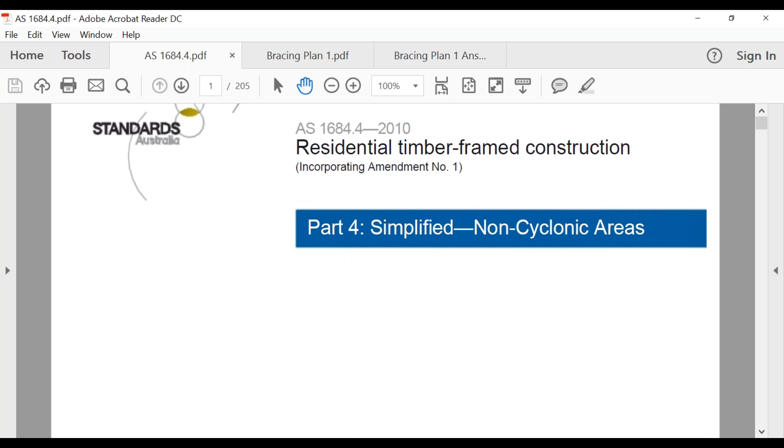So what I like to do is talk about the different aspects of our bracing. Throughout the course, whether online or in a classroom, your trainer has probably talked about tabbing and highlighting certain parts you'll be asked about in your license. We'll still do that tonight, but I also like to show people where to find it, in case you get asked a question you haven't been trained on, so you know how to navigate through the Australian standards, building codes, and legislation books. So I'll just shrink this a little bit.

So we are using 1684 tonight, and we're going to be doing bracing. Just so you know, if you had to find something in here and don't remember doing that in the course, you come to your table of contents, and hopefully from doing the course you'd know what you're looking at - am I looking for termite management, am I going to floor framing or flooring and decking, am I doing wall framing? You just go through your sections.

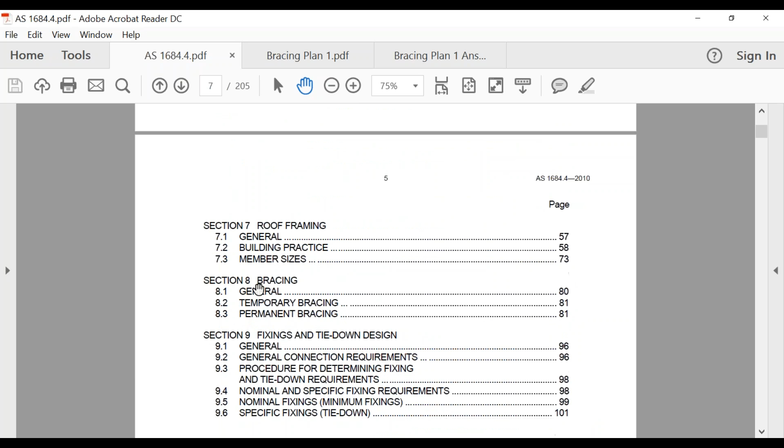So what we're doing tonight is bracing. You can see our bracing starts in section 8, and on this PDF it starts on page 80, so that's where we're going. Tonight I want to cover the beginning elements you might get in your multiple choice, where it talks about nominal bracing and the percentage you need, what a type A brace is and what a type B brace is. Also something about how much temporary bracing we need. We'll talk about these different types of bracing, and then go into the design phase - okay, I've got these plans and I've been asked to design the bracing for that house, how do I do that? That's basically what we'll do.

So I'll just go to page 80, bear with me a second. If you're doing this as a PDF, you can probably see my screen up top where it says page 7. Even though the book says page 80, because it's a PDF, the first couple of pages - the cover and inside cover - are pages 1 and 2. So if you're wondering why I'm typing page 84 and it says page 80, it's just because these numbers don't correlate exactly in a PDF. I'm going to page 84 to try and get roughly where the bracing starts... yep, nearly there... oh yeah, that made a liar of me, it did start on 80... oh no, it didn't.

There we go, page 80, and it's 82 up here. So the different things you can see there on section 8, we're on bracing. You'll hear me flicking through my book because my book's got a lot of highlighted stuff in it, and then I bring it up on the screen for you.

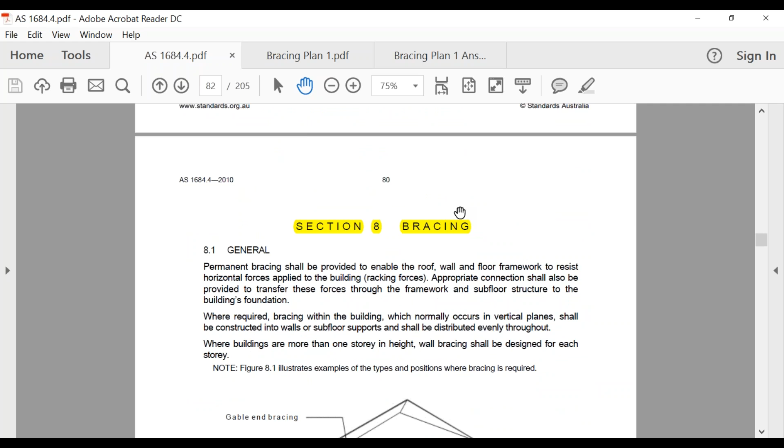The first part I want to talk about is temporary bracing. I've got it highlighted here. This might be something that you'll get in a multiple choice test, probably for those doing your DBM, DBU, or DBL in carpentry. As we just spoke about with Ben, doing his non-habitable, at this stage they don't have a multiple choice for you, Ben, but it might be something you need to be familiar with anyway, so it's definitely worth understanding and noting it in your book.

When we're talking about standing our wall frames and so on, temporary bracing is necessary to support wind and construction loads on the building during construction. Temporary bracing shall be equivalent to at least 60% of permanent bracing required. So that might be something in a multiple choice where it'll say, what is the percentage of temporary bracing needed, and you'll have options like 25%, 40%, 30%, or 60%. If you want to highlight that—I've just got a tab on my Australian standard that says bracing, so I know if I get a question on bracing, it's going to be in the next 5 to 10 pages. Definitely highlight it because it's quite popular in the multiple choice tests.

That's something the VBA do, and if you've been doing any practice ones with us, you would have actually seen that in there, I'm sure.

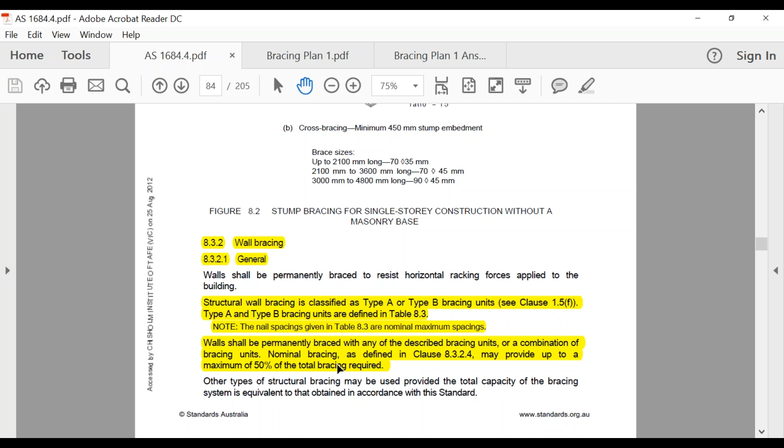What I'll do is flick over a page or two. In a nutshell, nominal bracing is pretty much your wall linings. So if we read—oh, we've gone too far, here we go, this part here. If you're wondering what nominal bracing is, I actually got this highlighted just in my own book because I inherited this PDF, so I didn't highlight the PDF stuff in it. I've got this highlighted in mine—I might make that a little bit bigger for you.

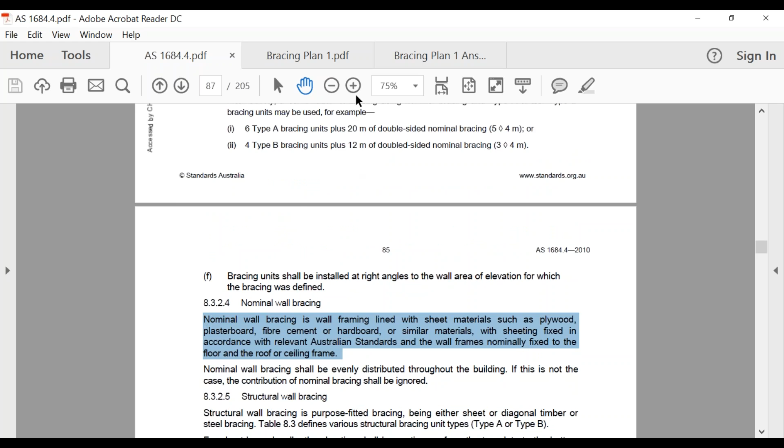Nominal wall bracing is framing lined with sheet materials such as plywood, plasterboard, fibre cement or hardboard or similar materials, with sheeting fixed in accordance with the relevant Australian standards, and the wall frames nominally fixed to the floor and the roof and ceiling frame.

So we'll look a little bit deeper into that, but basically what it's telling us is when it says plasterboard, so if we were going to put an angle brace on an internal wall, we can actually use plasterboard as an alternative to that angle brace. Personally, I've never put nominal bracing on, but if you wanted to, you could actually do it.

But the main part we need to be aware of, if we're using nominal bracing with plasterboard, it needs to be fixed to Australian standards. If you looked at the Australian standards for plasterboard, there are probably not many plasterers who actually fix it to that standard - talking about the amount of screws you've got to put in, where your joins are, in the internal corners, how often you've got to put the glue and stuff like that.

But not only that, when we come back here a little bit - this actually talks about our nominal bracing, because when I spoke about saying that we can use plasterboard, well the next question is, okay, how much plasterboard do I have to put on that wall for it to actually be effective as a brace? So that's when we look over here, it tells us on the page before that.

So one thing we definitely want to know, I'll highlight this as well, is 1 type B bracing unit equals 2 type A bracing units. So basically your type B is twice as strong.

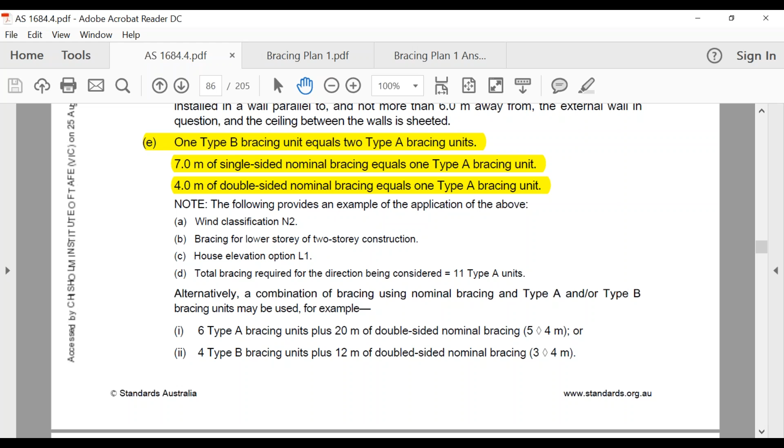Or on the other side, if it was going to be an internal wall and that wall was 4 meters long and we had plasterboard on either side of that, that double-sided plasterboard 4 meters long is going to be doing basically the same job effectively as what a type A bracing unit would be. So there's a couple of things you might want to highlight in your book - definitely that 1 type B bracing unit equals two type A bracing units, and that little part there.

I'll talk to this one a little bit later on.

So then the other thing I just want to show you too, which is down here - when we're talking about our bracing, be aware that unless otherwise noted, sheet bracing units shall be a minimum of 900 millimeters wide per type A or type B bracing unit. So when we're using our ply, and the way that it can be fixed and the tie down methods we can use, that's what differentiates between our type A and B when we use ply sometimes - they have to be a minimum of 900 millimeters wide to achieve that rating of what our bracing is.

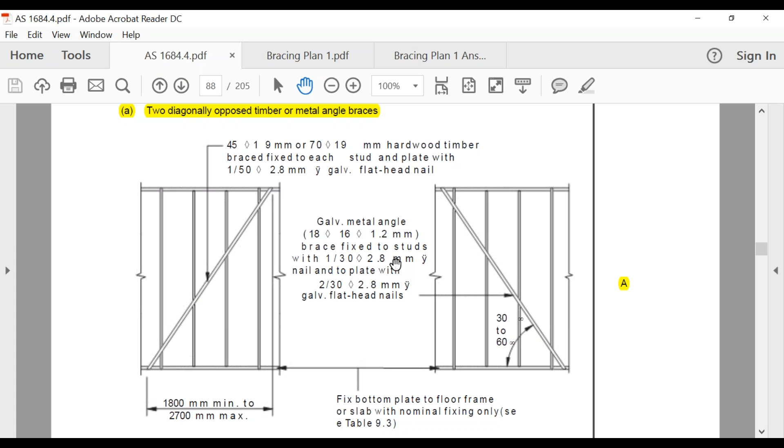So it talks about how it's got to be fixed, that it's a galvanized metal angle, and the size of your nails, how big that metal angle has to be. Another thing you might get asked about is the angle of the brace. Ideally we put it on 45 degrees, but anywhere between 30 and 60 is effective. So that might be another question: what is the angle that a brace needs to be? It's between 30 and 60 degrees.

Here's another one: this is our metal strap. So that's another one, it's also a type A, just as strong as this one here. Same thing, it talks about how it's got to be done between 30 and 60 degrees. It talks about our minimum and maximum measurements, basically what these can actually be, and then how it's got to be fixed.

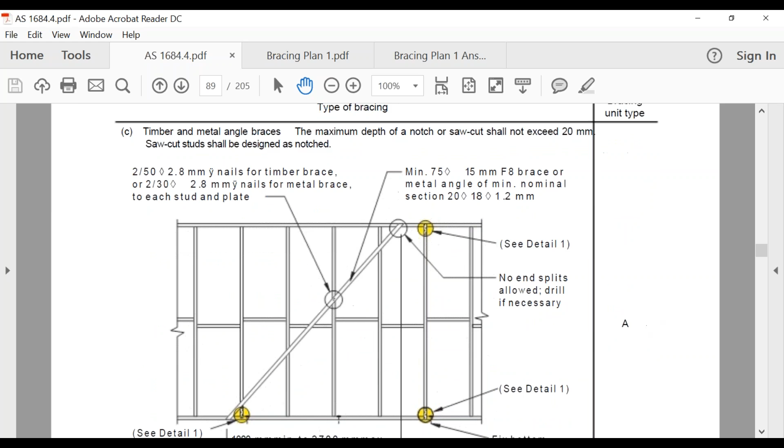So then I'll come down to this one here. This is basically our type B, and remember our type B is twice as strong. At a close look you might be thinking, hang on Adam, that looks very similar to the last one, but what makes this different is this strap over the top. Once we put those straps over the top, you can still see it's the same angles and pretty much the same types of fixings, and that's what makes it a type B.

So when you're doing your plans a little bit later on and nominating where you're going to put these braces and how many, they can actually be a combination. You might find the wall's not long enough to put a heap of type A's in there, so you might put 4 type B's and 2 type A's, and we'll touch on that a little bit later on.

Where are we? Here's basically some ply bracing, which is method... sorry, not method B, that's actually type B. I'll shrink that a little bit. It talks about how it's got to be nailed, and these are your different methods of how it can be fixed down the bottom. It says here that each panel has to be 900 millimeters.

So these are basically the ways it can be fixed into the slab. We can use M12 rods, or as it says for method B, an M10 bolt or any other 13 kilonewton capacity connection at each end, and then intermediate at 1200 millimeter centers. When it says 13 kilonewton, because there are so many different ways we can fix our bottom plates to our slabs with all the different chem sets, dyno bolts and Ramset products, as long as that is rated to 13 kilonewtons then it's okay. Obviously they can't list every product that comes out, so that's why they put an M10 bolt or other 13 kilonewton capacity connection. So that's a type B.

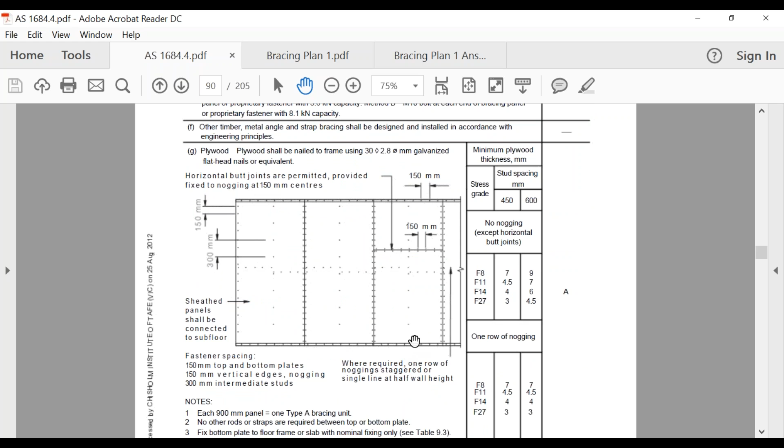And this one here is basically a type A. Just remember what we spoke about, that our type B is stronger. So even though this is ply, if you were to read how it's all fixed, it would be different, and that's why it would only come to a type A. But if we are doing it like this and having these connections, then that's why we're actually making it a type B bracing unit.

So you can look through there, there's lots of different bracing ones, and you guys are on site so you would see them. But personally, probably the most common ones that I've used are these ones here, and I've done the majority of my building in Queensland, and just because of our wind rating up there, this is pretty much how we do it. You can see this here.

It shows you've got this threaded rod through there, and that was something we used to do, basically every 1200 millimeters, chem set into the slab, with these threaded rods going all the way through. If you had a 2-story, it'd basically go from the slab all the way through to the top plate of the top floor. So you might not be familiar with all these, but as long as they are going to be type A or type B, you can make whatever selection you like that's going to work for you.

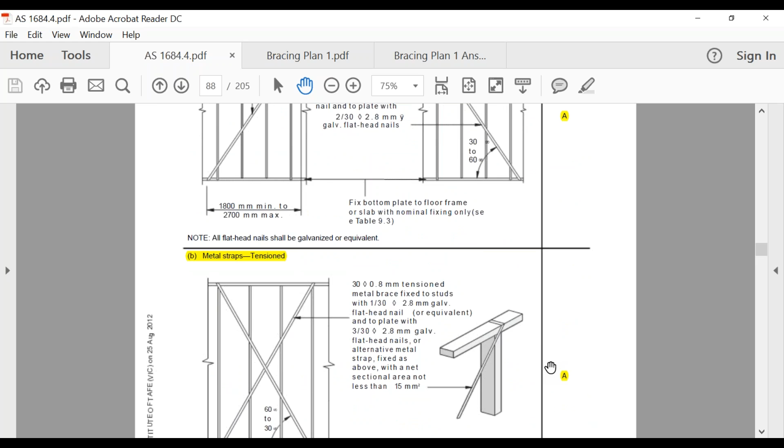So there's a little bit of information about the different bracing types. By all means, if you're not familiar with them, have a read over them, and depending on your license type, try to at least be familiar with the ones you're using on your site. Get a little bit familiar with them, because they're applicable to most licenses the VBA asks about, unless you're doing a finishing license like plastering or tiling.

All right, so I thought what we'd do from here, guys, is take you through how we actually work out, now that we've got a bit of understanding of our nominal bracing and bracing types, how we actually work out basically how many bracing units we need. So bear with me a second, I'll just bring up the page.

This part here is on page number 83, and depending on how confident you are with this, it's probably not bad just highlighting it in case you feel you'll need to go back and reference it later, because this actually steps you through how you do it. So if you think you're all over this, and then six months down the track the VBA is so slow, and you're having your interview and they ask you to design it, you'll go, oh geez, I remember Adam teaching me this. If you read through this, you really can't go wrong.

So this is the procedure to work out our bracing units. I'm going to read through this and then explain it as we go.

So the first thing we need to do is determine the wind classification. Obviously on our plans, it's going to have our wind rating.

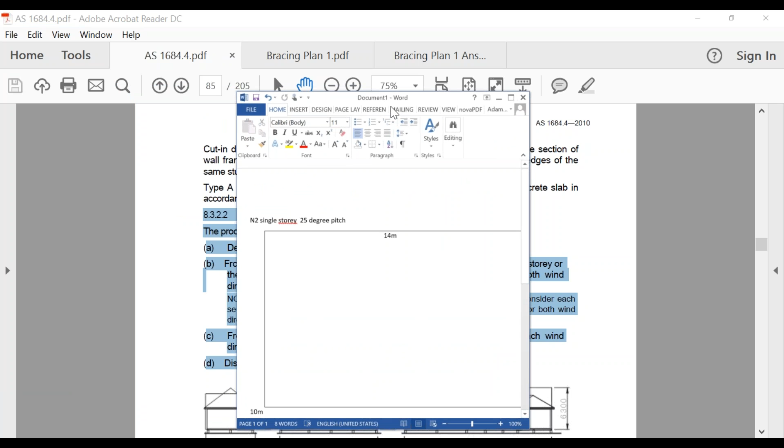And what I've just done is a little basic thing here - I'll bring this over, because I didn't want to use the ones out of the book just yet, for me to step you through it, since I'd like you to do three on your own. So I've done basically a little elevation, like a floor plan I suppose, of a building. I know it's pretty basic, since obviously I don't have AutoCAD, I've only got Microsoft Word. This is basically from above - this wall is 14 meters long, and this wall running up and down is 10 meters.

And I've said here that it's an N2 wind rating. It's a single-story house with a 25-degree pitch roof. So that's normally the information you'll need to actually work out your bracing units.

So the first step - it's not going to let me highlight it anymore - was to basically determine the wind classification. From my diagram there, we can see that it's an N2. So that's the first step done.

So the next one, it says from figure 8.3 - I'll read through it first. From figure 8.3, determine the appropriate house elevation option for single story, or the upper story, or the lower story of a two-story construction, for both wind directions.

So this here is our figure 8.3, and we're going to look at it and go, okay, if it's a single story or the upper story of a two-story house, they're basically done the same, so we use this one here. It says this is for single story or upper story construction, and this one here is for the lower story of a two-story construction.

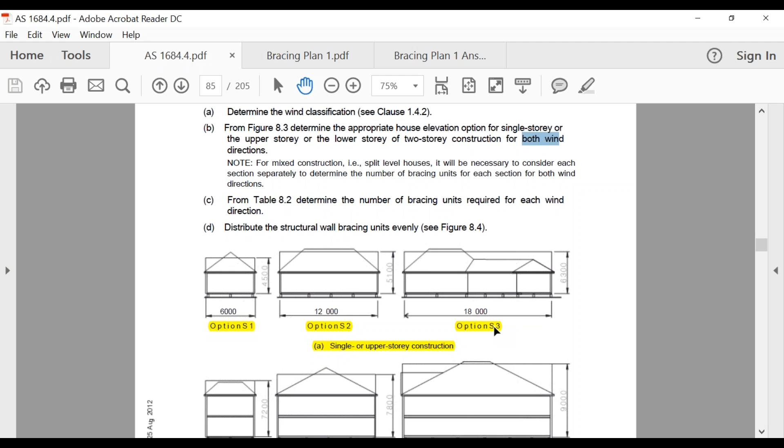If you're getting a bit confused, don't worry, because we're going to get this information and put it into a table very shortly. So just to make it clear, this one here is option S3. We know that's basically for designs bigger than 12 meters, but no bigger than 18 meters. So we've worked out S3.

So then we need to figure out for direction B. I'm just going to put a B here so I don't confuse myself and yourselves. Direction B is actually 10 meters, so the wind blowing from left to right, the length of that wall is 10 meters. It's bigger than 6 but smaller than 12, so it's option S2. I'm going to write that in here.

If I come back now to my standards, you can see we've done the first two steps. We've determined our wind classification was N2, then determined which of these figures we need to use. Next step is go to table 8.2 and determine the number of bracing units required for each wind direction. If we scroll down, this is table 8.2, where we start to line up all that information.

If we come back to my little dodgy plan, we know we're doing N2, so I've got to be using this table here, not the top one, because we're using an N2 wind classification. We determined our house was a single story, so we've got to be using these figures in here somewhere. Sorry, I meant to highlight all of those, let's see if I can highlight it. I've just got to be using those figures for N2 and single story.

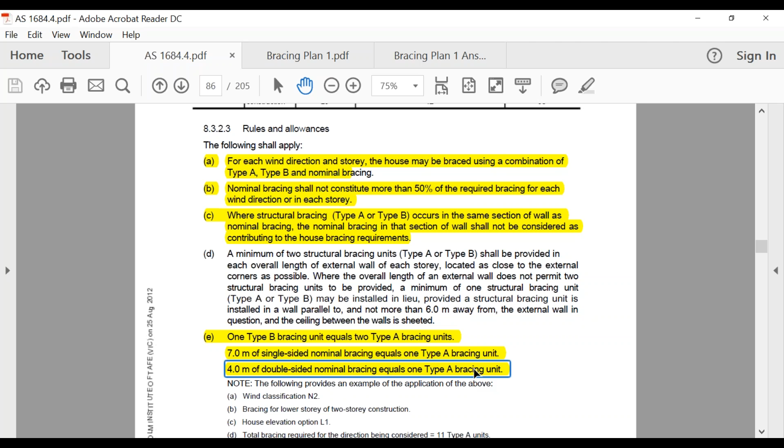So I've just got a question here from Valavan, how to determine A and B again. I might just take you off mute, Valavan, so we can chat for a second. Are you just talking in relation to the wind direction, how I've called it A and B on here? Is that what you're talking about, Valavan?

Yes. Yeah, so how do we determine it? Basically I just called that wall there wind direction A because you've got to have a wind direction. So I've called that wall wind direction A, that's the wind coming from the top of the screen down. And I've called this wall over here, which I can't highlight, wind direction B, the wind blowing from left to right. You just named it yourself, yeah, I just named it. You'll find normally the plans we give you will have an arrow on there, almost like how on plans you see where north is. The plans will normally have wind direction A and wind direction B.

So it'll then show you which way that's actually blowing. It'll be explained a lot better in our documentation rather than this little Word document. I just put this together this afternoon to use as an example.

Yeah, I thought it's just something to do with type A and type B. No, sorry, it doesn't, I probably should have used different letters actually. That's a good pickup, next time I'll use wind direction D and F or something, might be less confusing. All right, cool, mate.

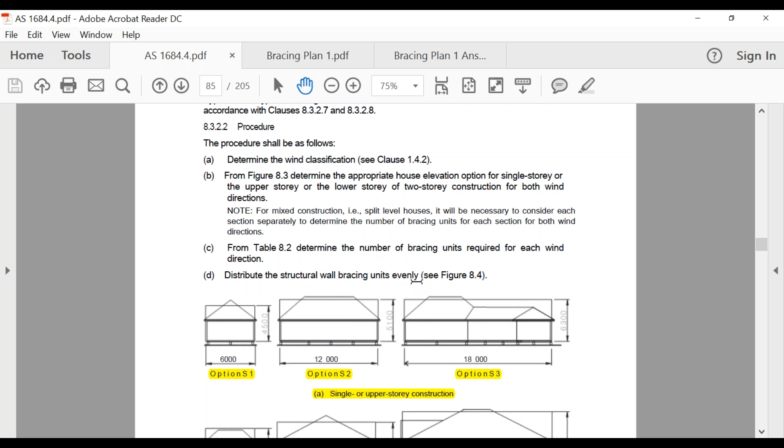So if I scroll down a bit, there'll be a diagram here that shows it, just after all the different bracing types. So this here is talking about the distribution of the bracing. It says bracing shall be approximately evenly distributed and shall be provided in both directions, as shown in figure 8.4.

It says bracing shall be initially placed in the external walls and, where possible, at the corners of the building. So we want to try and get it in the corners, as you can see here, and that might not always be possible because there might be big glass sliding doors or big windows. But external walls first, definitely, then where possible at the corners, and then the rest of that bracing should be evenly distributed throughout the internal walls.

So we'll do some stuff tonight when we do ours, and I'll put up an answer guide. And I can guarantee you, if we've got how many people on tonight, probably 15 people, we could get 15 different answers and they could all be right.

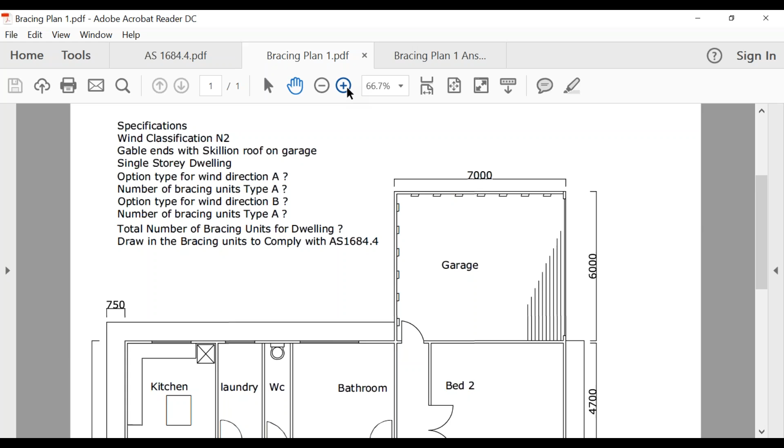It says it's N2 wind rating, with gable ends and a skillion roof on the garage. Don't worry about the garage - those are basically your piers there, which hold the brickwork. As you've seen in brick veneer homes, normally in the garage there won't be any timber frame. A lot of builders just have it all brickwork with those piers all the way up, so they're actually bracing themselves - you won't have to do anything in the garage.

When it says option type for wind direction, a lot of people look at that and go, geez, what are they asking me? What we're trying to get at is just stepping you through the process. So when it says option type for wind direction A, what we want you to write is S1, S2 or S3, or if it's a double story and you're doing the lower level, L1, L2 or L3 - just getting you to write down what they are.

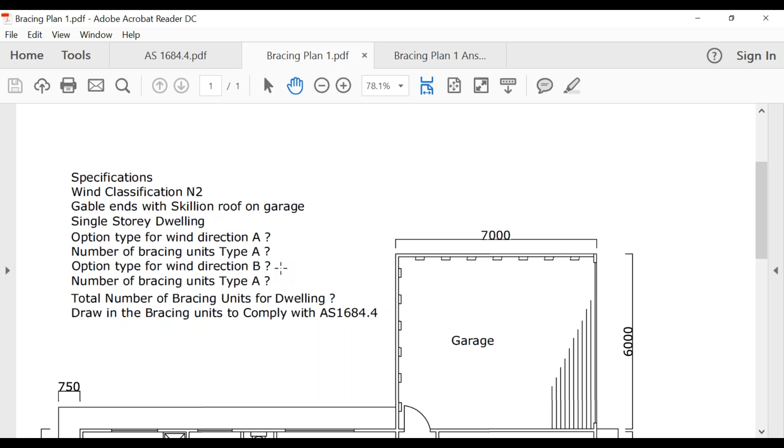So for wind direction A, coming from the bottom of the picture up, you'll work out that it's S3 or whatever it would be. Then you go to your table and find the amount of bracing units needed, do the same for the opposite direction - say it's option S2 and therefore you need 25 units. Once you work out those units, you draw them on where you'd put them, and I'll bring up a little answer guide and email that over to everybody.

So let's leave that and have a crack at it. If you're lost, have a go anyway, and if it doesn't make sense, let me know and I'll step you through it. I can send over the answer guide too, which you can refer to, to see how Steve's done it, since Steve writes the curriculum, and we'll go through it.

And if you've done this exercise before and want to do it again, all you could do is change the wind rating to make it an N1, and that'll make it a fresh exercise for you guys again.

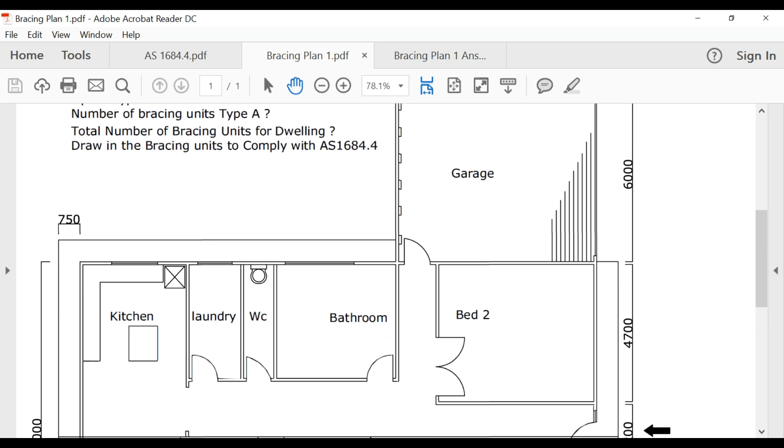Yes, that's the roof pitch on this one. That's a good question, Michael. It's pretty hard with that, so why don't we just make it over 5 degrees? We'll just say that it's 20 or 25 degrees if you like. I didn't notice that wasn't on there.

All right, so with yours, Subit, yeah, you are correct. So when it says the total bracing units required, that can be a mixture of whatever, but it's always that number.

Let me come back here. So the number they give us when we come to this table is always going to be type A bracing units. So when we use type A bracing units, it can be that nominal bracing if we like, or it can actually be our structural wall bracing. It's just basically, because as we know, if we've got 7 meters of single-sided plasterboard, that's one type A unit, or 4 meters of double-sided plasterboard, that's also 1 unit. So that's how many type A units.

But my advice would be that when you design it, just say type A and type B, and write down the bottom: my type B units are plywood bracing and my type A units are angle bracing, or something like that. Hopefully that makes sense to the question you were just asking me.

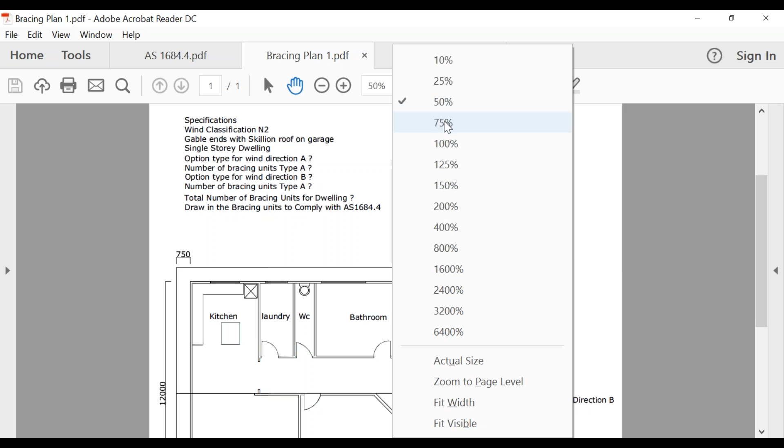So, oh, it's a bit too small, isn't it? I just want to see if I can get a little bit bigger. Put it about 75% and see what happens. That's no good. Maybe if I go like that. Can you guys see all the measurements from there?

Cool, no worries, Alex. Cool, thanks, Dean. Just give the other guys a bit longer to get it done. Cool, thanks, Herbert. Cool, thanks, Alex. Thanks, Jeff. Looks like half of us are done, guys, so probably another 5 minutes and we'll probably have it all done. Cool, thanks, Ben. Yeah, thanks, Tom. Cool, thanks, Michael.

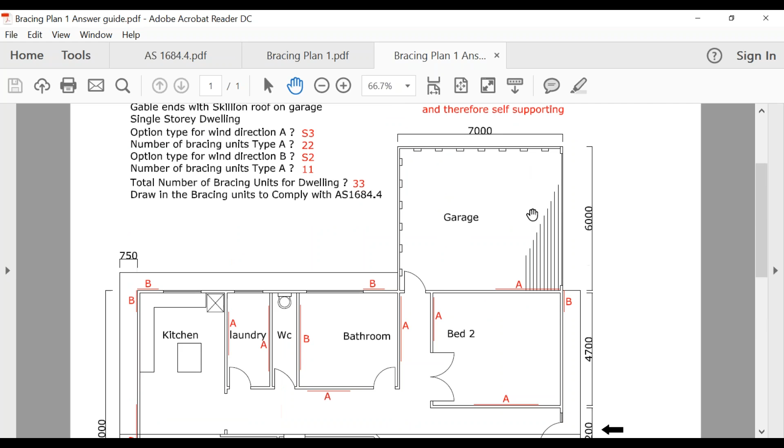But as I tried to tell you before, there was nothing that needed to be done. The explanation is the garage does not come into the bracing as it has engaged piers and is therefore self-supporting. That's what these little brick-looking things are around the outside there, and this would be where our roller door was.

Hopefully, Valavan, I'll unmute you there for a second, mate. Yep, fire away. Oh no, sorry, I've muted you again, sorry mate. I don't know what's going on there, it won't let me unmute you, instead it's sending you a pin. You must have to put a pin in on your end because you're dialed in on a phone rather than a computer - is that right? Sorry mate, I don't have any idea what happened, I've never had that happen before. We'll see how you go. While Valavan tries to unmute himself, I'll bring up this next exercise we're going to talk about. When you're unmuted, Valavan, I had to send you a pin and it's been sent - just jump in and we'll take off from the question you had.

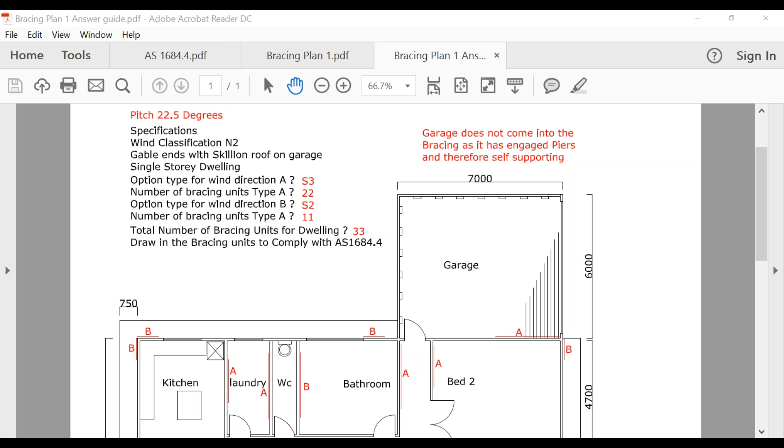Oh, the size of the plywood bracing? As far as the size goes, our standards state it has to be 900 millimeters wide, and you'll see that on any of those pictures showing our Australian standards for bracing. Actually, I'll just show it to you, it's probably easier.

So we come down to our plywood. It says here that each panel basically has to be 900 millimeters wide. So in order for it to be a type B, it needs to be 900 millimeters wide, and it needs to go from the bottom plate to the actual top plate. It shows you here that we can actually have a join sheet, but it talks about how it's got to be nailed.

So cool, Alex, I'll go there - how do we get S2 for wind direction B? Let's just bring that up and have a look. Wind direction B was coming from this way, and it's basically 12 meters because we don't need to account for the garage, as it's actually self-supporting. We're only working out the bracing on these parts of the wall, so therefore it's actually 12 meters - bit of a trick one in there.

Cool, bear with me a second guys, I'll just bring up this other one and you'll have it in your folder. Just bear with me a second and I'll bring it up on the screen. I'm in struggle town today working this computer.

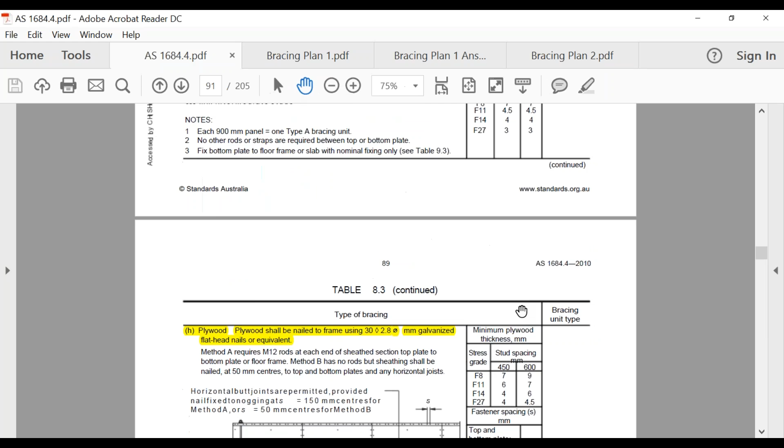When you look at this picture, it shows that whole wall is ply, but you've only got to do 900 millimeters, and that equals one type B unit. If you put another one next to it, you've got 2 braces there. Realistically, you're probably not going to brace a whole wall like that because it doesn't need that many bracing units on it. The only reason you might do it is because you've got to pack out your studs anyway, and you're doing something as a weatherboard. But if you did one 900 mil, that would be that unit there, because that's what it says down here - each 900 mil panel equals one type B unit.

So looking at this, you've got 1, 2, 3 type B units there - so really 6 type A units with those 3 sheets. If that is the case, if you're doing 2 type B there, and if there's a rule like 9 meters apart, we have to do the bracing every 9 meters, or we can't go more than 9 meters.

So if that is the case, are we measuring from the end of the bracing or wall to wall? From the end of the bracing. Okay, end of the bracing. Yeah, exactly. Thank you. Yeah cool mate, no worries at all.

So with that, Michael, are you talking - you want me to send you the actual drawing that I just had up? Is that what you're asking me to send you? You're asking me to send you this one here? Yep, cool mate, I'll send it over. Just bear with me a second.

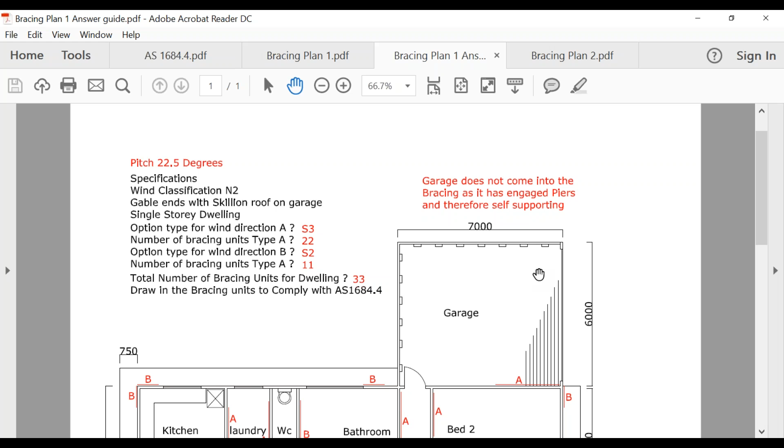That's all right. It's again between structural and nominal bracing, yeah? Yep. If we look at the answer you explained just now on the first example, do you have that page there? Yeah. This one here, you mean? Yeah, first answer. Yes, on these plans here we can see structural bracing A and B, on these red ones. But my question is, these are all structural bracing, yeah? Yeah exactly. My question is I thought we had to work out the total bracing, which includes some nominal bracing, so where are those nominal bracing? Oh, do we not have to? Yeah, that's easy, because the thing is, your house doesn't necessarily have to contain nominal bracing.

It's only if you choose. So if you look at my picture here, you might choose where this A brace is, if you see my mouse over bedroom 1, if that wall is long enough, which it is, roughly 6 meters long, you could put plasterboard on either side of that and use that instead of an angle bracing. But you don't actually have to use nominal bracing. You can decide to put an angle brace in there because, depending on your wall lining, it might not be acceptable to use nominal bracing there. So don't stress too much about nominal bracing. It doesn't have to be designed into the house. I would just work out your bracing units as if they were either going to be ply or strap, and leave out the nominal bracing altogether. The only reason you need to know nominal bracing is in case you get asked in a multiple choice question what percentage of nominal bracing you can use.

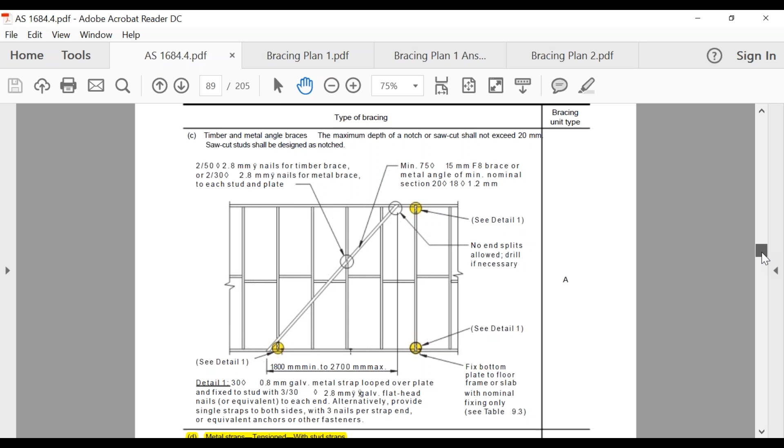Okay, so my question just now is in table 8.2, because we work out this bracing A and B here on this plan based on table 8.2. Yep, so those numbers really mean structural bracing. Exactly, it says number of type A bracing units, so however many type A. So when you come down here, you basically pick that's a type A, you could use those if you wanted - if I come up on my screen, this is type A as well, so that's how many of those you need to use. But as we spoke about before, you might find the house isn't big enough to put 22 of those on there, so that's when you can start to use type B as well. But it's type A units. What I meant is, say for example, if you look at table 8.2, it says at the top, amount of bracing - so it should actually mean amount of structural bracing.

Am I right or wrong? Yeah, you're right. It's the amount of structural bracing. But just remember, structural bracing, should you choose to, can be replaced with nominal bracing, if you choose to.

So it's basically telling us how many bracing units are required, and how many structural bracing units. But if for some reason you chose to take out a structural bracing unit, you could put in a nominal bracing instead if you chose to.

Hopefully I haven't confused you - have I? Why are we given that freedom? I thought structural bracing is to give that structural integrity.

Well, they've obviously gone and tested and realised that if they use 4 metres of plasterboard on either side, that's just as strong as a structural brace anyway. Because if you use a nominal brace, it's also got to be fixed a certain way - you can't just chuck a little 600 piece of plasterboard on there.

It actually states that if you want to use nominal bracing, it's got to be 4 metres of double-sided nominal bracing - so that could be your plasterboard. Either side of a wall, both parts being 4 metres long, and if that's got plasterboard attached to it as per the Australian standards, that's just as strong as a Type A structural wall brace.

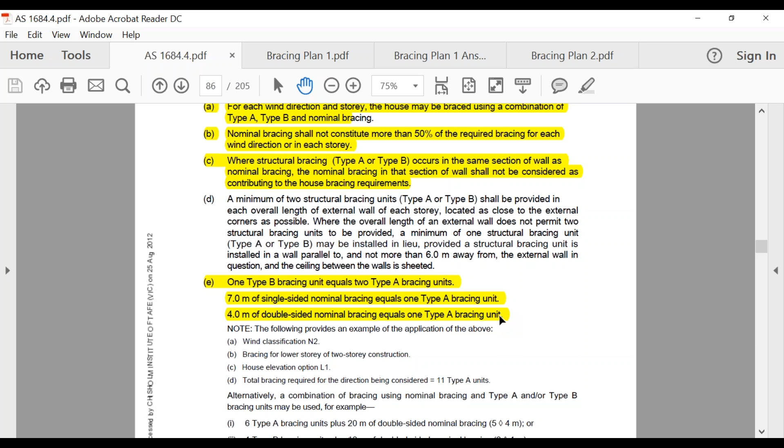Because you could actually go and replace these with nominal bracing, but you can only replace up to 50%. The other 50% has to be structural bracing.

Okay, I'm fully with you now. Sorry for confusing things. No mate, don't be sorry at all - that's what we're here for. This and last week's module are the two that take the longest to explain and to learn.

No worries, if you've got any questions definitely let me know. We want to make sure you understand it, so when you're going for your interview, you actually get it passed.

In fact, this is my second time doing this module, but I was very pleasantly surprised that I learned something very new. Yeah, that's good. I remember myself, even the first time I did it, I thought, I'm a carpenter, I know how to do bracing. And then I looked at this and I went, I've got no idea - I just know how I've got to fix it. If you'd said to me, hey Adam, where would you put the bracing, I would have said I'd put ply here, I'd put angle there.

But before doing this course, I would not have known that I needed 22, and that if I use type B, I'd only need 11. So I was the same - I find this a really good unit, and it's something we can actually use on site, to have a look at the jobs they're doing and see whether it's over braced or whether they've just gone with the minimum.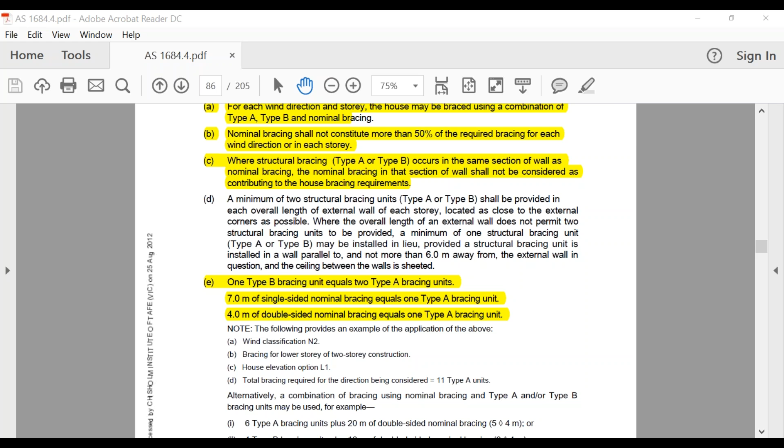So what we'll do from here, we'll do this exercise, but I'd like to just show you a couple of things in your Australian standard - actually go through the whole standard and make sure we've got it tabbed and highlighted. It's up to you how many tabs and highlights you want to put in. I'm a big fan of highlighting a lot of stuff, but after a while once you get used to the standard, you'll probably remove a lot of the tabs. A lot of the guys I train find it gets too confusing having them all there.

So I thought we'll go through our standard and make sure we've got all the parts we need highlighted and easy to access for our interview and/or multiple choice questions. And then we'll go on to this exercise here.

It's one of those things - I'm a fan of getting you guys to answer this without telling you what to tab and highlight, because it helps you find the answers easier. I think it's good if you get thrown in the deep end and it forces you to learn how to find stuff. But with the limitation of the online system, I normally do this face-to-face, but online I don't, because if someone's struggling and looking for ages, I can't see that. Whereas in a classroom, I can go up and say, hey, which part are you up to? And they can say, I can't find this part where it talks about fixing the noggins to the studs, and then I can assist them.

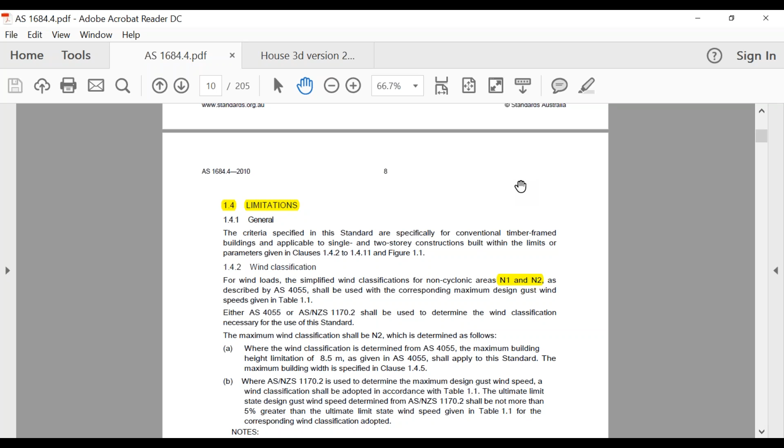Just in case you missed last session, I'll do the whole 1684. The reason I'll do the whole thing is because next week we'll actually be going on to masonry, and we won't be using our 1684 again until it comes around again. So the limitations is something I brushed on at the beginning of tonight's session - limitations basically says this is what this Australian standard is limited to. As far as our wind classification, this one is limited to N1 and N2. I'm on page 8 if you've got your hard copy and want to follow along.

You don't need to know this, I suppose, but it does tell you what is actually N1 and N2. But down here, here's some limitations that we need to know.

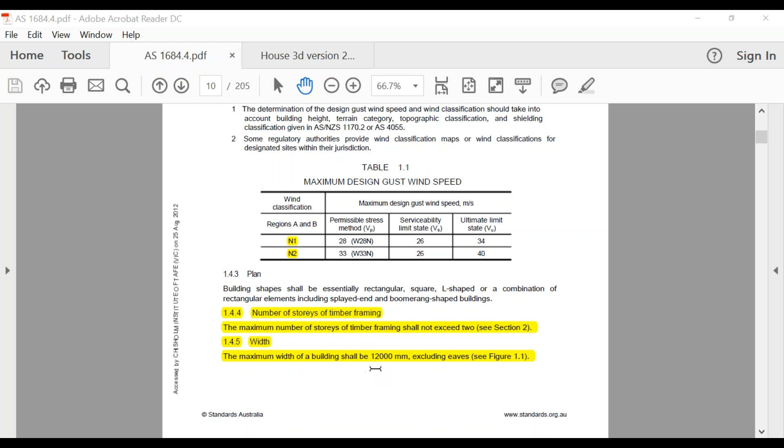The maximum number of stories of timber framing shall not exceed 2. As you remember, this is just as far as this standard goes - we've all built houses that are probably bigger than 2 stories. The maximum width of the building shall be 12 meters, excluding the eaves, and it gives us a little picture there. If you're wondering, hey, why didn't we just do that bracing exercise and it was 18? The width, as you can see, is basically this part here - it's not talking about this return.

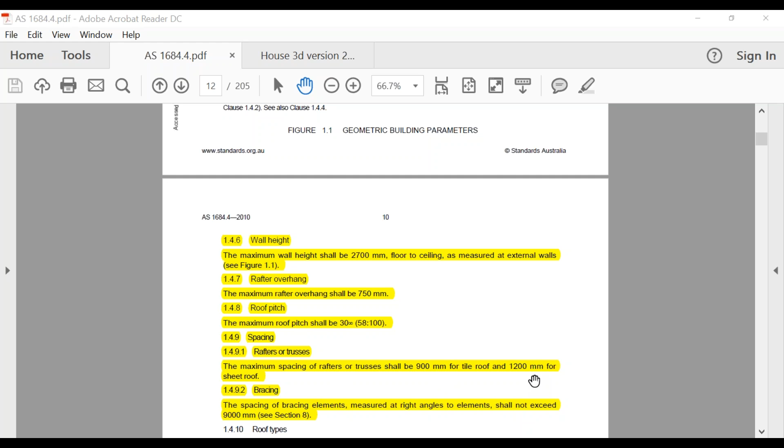All right, wall height is 2.7. Our roof overhang, our rafter overhang, is 750 mil. The maximum pitch roof we can use with this standard is 30 degrees. Because this is a PDF, we found this last week that sometimes things don't show up well, but that's saying 30 degrees or 58 to 100. The maximum spacing of our rafters and trusses should be 900 mil for tiles or 1200 millimeters for sheet roofing. And the spacing of bracing elements measured at right angles shall not exceed basically 9 meters.

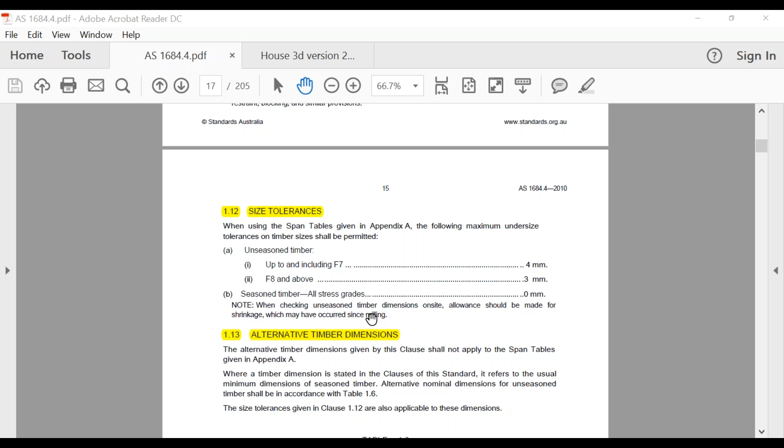Sorry guys, I'm just scrolling through. These sizes and tolerances - this isn't something I've had feedback from any of the students I've trained have actually used, but I know Steve, the training manager, likes to talk about it. It's basically a table that talks about the alternative timber dimensions, the minimum seasoned timber dimension, and the allowable for unseasoned. So it talks about when you change them, and also the size tolerances of how much they can actually tolerate in the actual size of that timber.

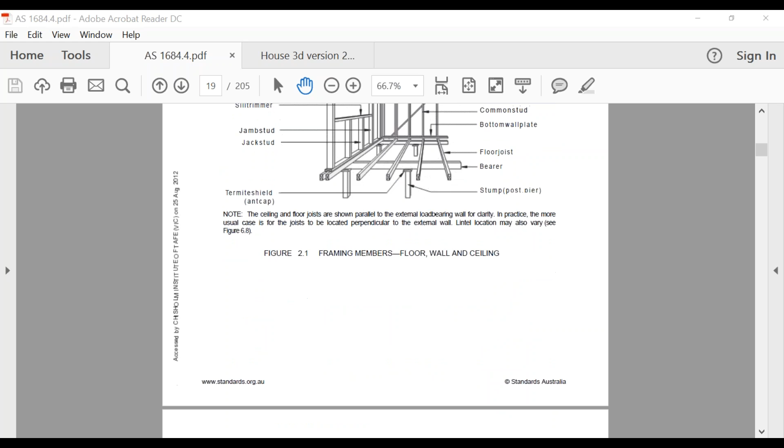One topic is vertical lamination, which is about nailing timbers together. Nails shall be a minimum of 2.8 millimeters in diameter and staggered as shown in figure 2.8. You can also use screws. This applies when joining two bits of timber on edge, not top plates, but timbers like that.

This could be strutting beams, bearers, floor joists, hanging beams, things that are on edge. You put the two nails there, and the spacing of these nails can't be any further than 2 times the depth of the timber. So if it was 100 millimeters deep, round figures, they couldn't be any further apart than 200 millimeters, and they need to be staggered - one down the bottom, the next one up the top, and so on.

Then it talks about the same stuff here on doing stud lamination. If we're joining two studs together, it talks about how they've actually got to be fixed together.

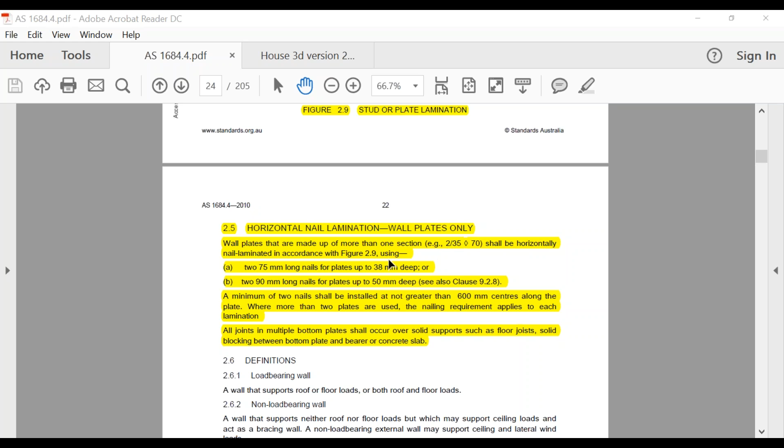This one here is something we'll do tonight, and it talks about horizontal nail lamination for wall plates only. So this is like your top plates and bottom plates, wall plates made up of more than one section - for example, two 35 by 70s shall be horizontally nail laminated in accordance with figure 2.9. It shows us where we've got to put those nails in, and gives us the measurements through there.

I won't bother reading through all this tonight, guys, or otherwise we'll be here till midnight. But I just want to make sure we've got these things highlighted, and they're pretty self-explanatory - if not, I'll talk us through it. That's basically how we've got to nail our wall plates.

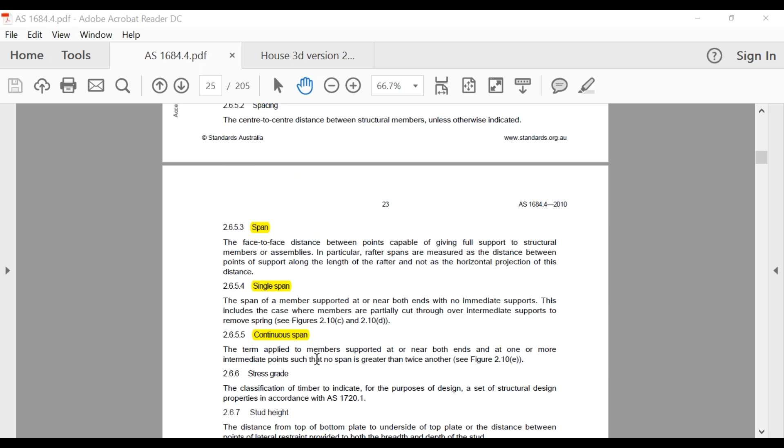That's a little bit of definition about what span is, single span and continuous span. We touched on that last week when we did our bearers, and then down here there's some pictures of it as well.

This was about our footing classification. If you're not familiar, when we're doing our footings on bearers and joists, we've got a stump in the ground. There's basically 5 different types of footings, and the number determines footing type 1, 2, 3, 4, or 5, which determines how big the concrete pad is at the bottom of that footing. We've just got to be mindful there's a kPa bearing pressure for those types of footings.

So it might be something you'll get in a multiple choice. I've got that tabbed and highlighted as footing classification. Then if you go to this table, it talks about how big that footing pad needs to be for our different types of footing 1, 2, 3, 4, and 5.

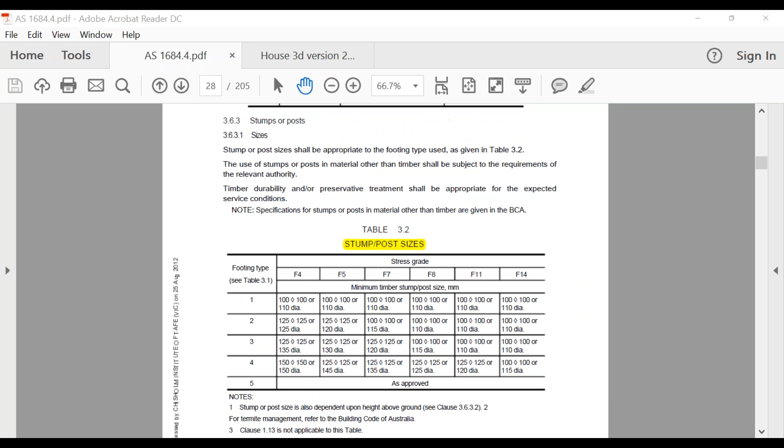Some of you guys doing multiple choice online while practicing for your interview might see questions about how far out of the ground a stump can be and how far they've got to be embedded. This talks about it here.

It talks about the above ground height of any stump or post, determined using table 3.2, shall not exceed 15 times the required face width or diameter. So whatever diameter it is, or the face width if it's square, it can't be more than 15 times that out of the ground.

Then it talks about the embedment - whilst we talk about how big our pad footing needs to be, this talks about how far it actually has to be embedded into the ground. If you're doing multiple choice online you might see some of those questions, and that's what it relates to. I've got this highlighted as well.

Last week when we did our subfloors, the way I do it is work out my bearers and joists, then come back and work out my footing classification after that. This is the table that gives us the footing type we can use for the certain bearer we're using. We covered that last week, but I've got that highlighted.

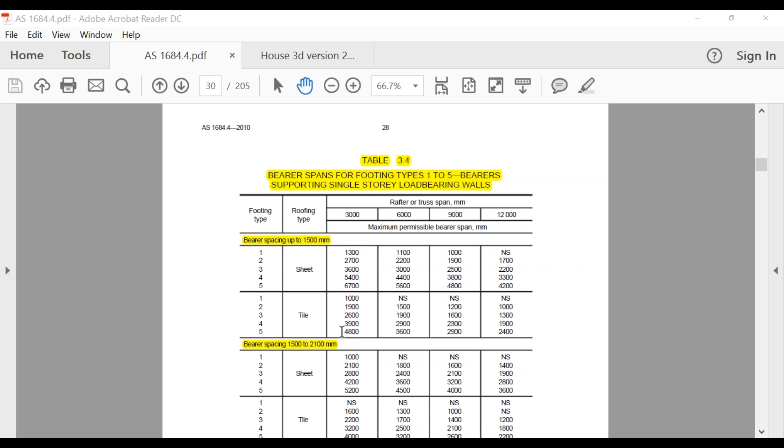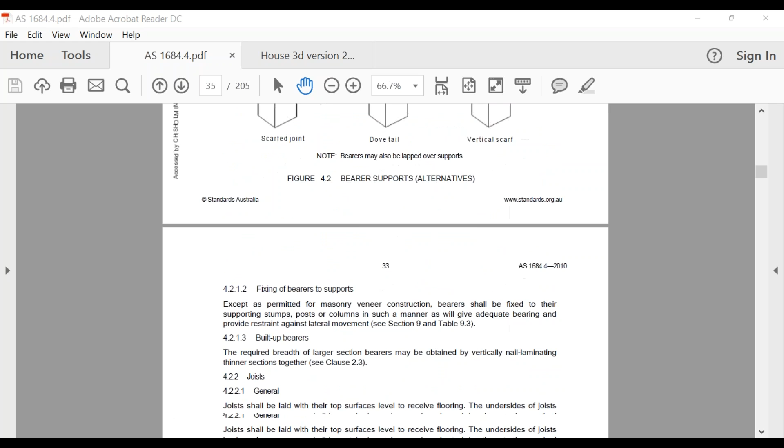So I'm just scrolling here. This is one thing we covered last week, but make sure you've got it tabbed if you haven't already. This is about solid blocking. When we've got a joist that's basically 4 times higher than it is wide, say 50 millimeters wide and 200 millimeters high, that's considered a deep joist, and because of that we need to put solid blocking in there. We can use herringbone strutting, which I showed you guys last week, so I've got that highlighted and tabbed relating to deep joists.

That one there basically shows how, on page 41, your flooring needs to be laid when you're doing your yellow tongue or red tongue or whatever sheet flooring you're using. It talks about how they're going to be staggered and the nails that you've got to put in.

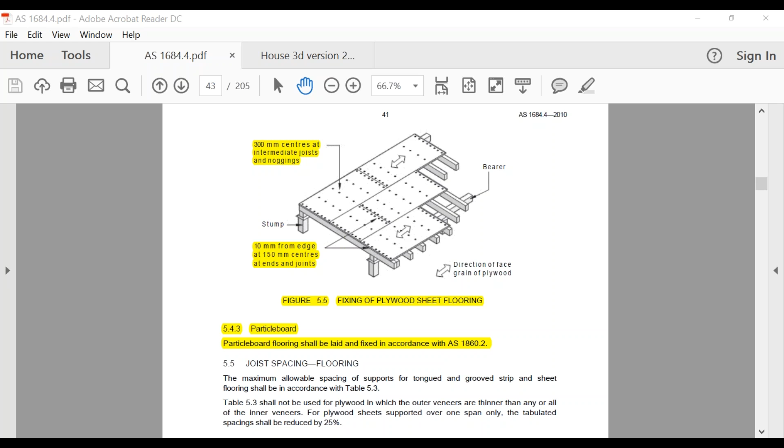So this is something too, still in our wall framing section. Sorry, when I get down to our wall framing section, now we're in wall framing, and this is something we'll do tonight. It talks about the blocking that we put in between our wall frames.

This comes up quite often in your multiple choice. A minimum 200 millimeter long stud size block, and they can't be any more than 900 millimeters apart. That says suitable for external brick veneer walls.

Basically, sorry Val, I saw your question, I'll get back to that in a sec. Basically how big the notch is. Sorry, so with yours, sorry Val, that was about 5 minutes ago. So is that in relation to the vertical lamination, mate? Is that what you're asking me? Yeah, one sec mate, I don't know off the top of my head, I don't think so, to be honest with you.

No, it does say - so Valentine has just asked me, with the vertical lamination, do you have to use that nail pattern I was showing on both sides? The standard says they shall be through nailed and clinched, or nailed from both sides. So basically either way, you'll probably find guys will just do it from both sides to be safe. I've probably told this story to some of you before, but one of the guys I trained face-to-face is a site supervisor with Porter Davis, and the client, whilst Porter Davis had their own building surveyor come out and do inspections, chose to actually have a private one come out, and the private one picked up the lamination on the studs where they put some jamb studs in.

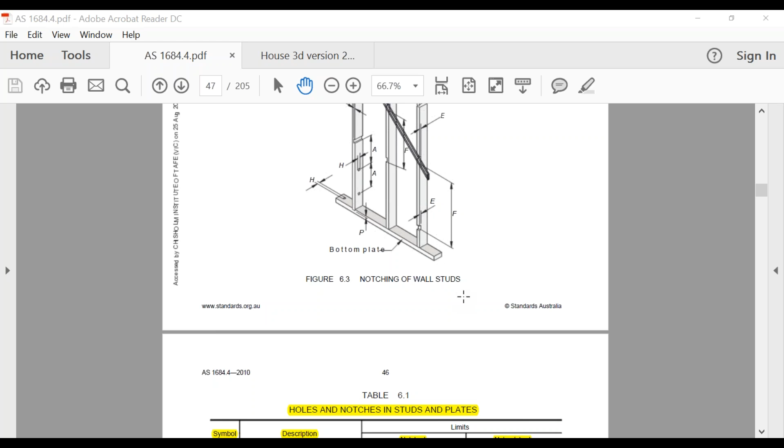Yeah, he basically, the site supervisor then had to call back the tradie and say, mate, your frame hasn't been signed off, you haven't actually put enough nails in from your jamb stud into your secondary stud. All right, so here is basically those notches I was talking about, just be aware of these little notes down the bottom that we can actually notch at 25 millimeters for baths - we'll do waterproofing in the coming weeks and talk about that. It also says except as permitted for diagonal cut in bracing, notches up to 20 mil may occur in every fifth individual stud.

So, except as permitted for diagonal cut bracing, basically every fifth stud applies. We'll scroll on past that one.

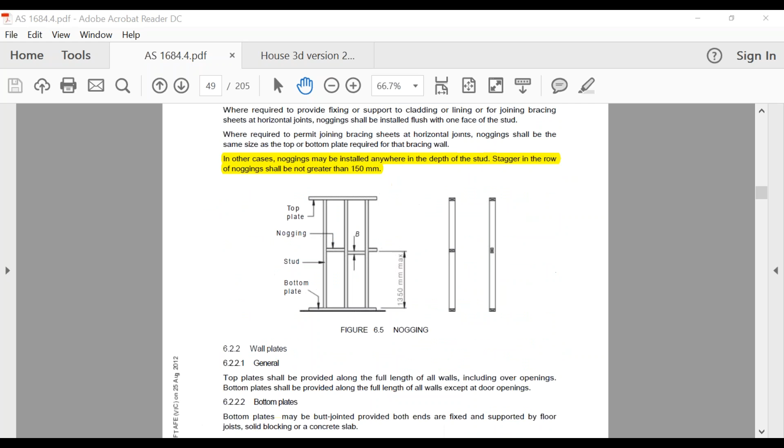This talks about our noggings. They can't be any more than 1,350 millimeters apart, and when we stagger them, it shows further on that they should be no more than 150 mil apart. I've never done a wall frame where I haven't offset them exactly like that, but if you had to, the maximum you can offset those noggins is 150 millimeters.

All right, so for those guys, we don't actually have Greg here tonight. Greg would be someone who'd probably be interested in this next one.

So tonight, once I finish going through this standard, we're going to go through concentrated loads. Don't worry if you don't know what a concentrated load is yet, but basically this talks about studs supporting concentrated loads. You'll never be asked to do the maths on it.

Oh, you are here, Greg. Cool, I didn't see you sign in tonight, mate.

So when we're doing some computations later on, one of our jamb studs is actually supporting a concentrated load, and we'll talk about that a bit later on. When you go to the span tables, it talks about computations for concentrated loads, it refers you back to here, then to somewhere else, and so on, and you can actually work it out.

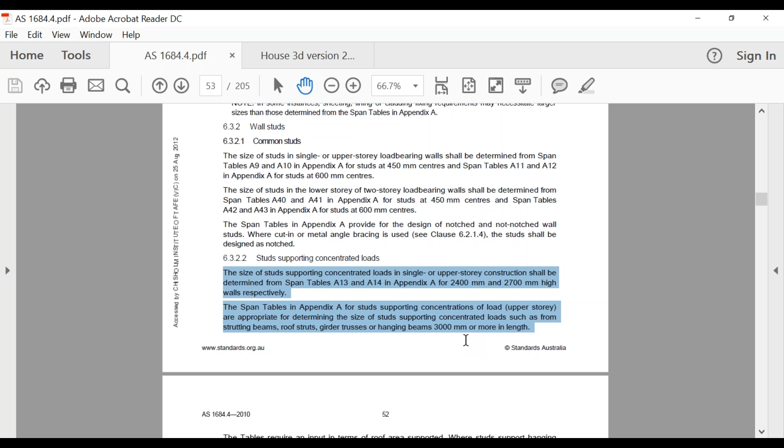Just in case those guys are wondering, hey, how do you actually do that, it is actually on this page here, but don't worry. I don't know of anybody who's ever actually been asked that in their interview. It's just for guys who like to know every little part of the book. That will tell you how to do it, but it's pretty full on.

You've got to work out basically the percentage of the roof that it's actually supporting, then work out what is the weight of that load, whether it's tiles, and yeah, it's pretty in-depth mathematics. So you won't be asked in your interview, but it does pop up.

So this is it here. You've got to basically work out that stud is supporting this because that's a concentrated load, for this reason there, because they've got some sort of purlin through there or hanging beam, and they work out the area of that and what percentage that is of the roof and then calculate that onto the stud. Not something in this course and not something you'll be asked, but it does talk about it should you want to learn the standard in a bit more depth.

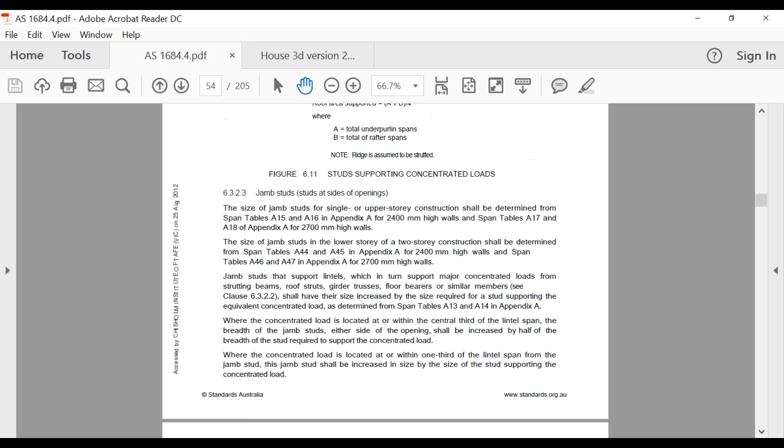All right, so down here we start to talk about our bottom plates, and one thing you'll see tonight when we do these exercises is that when we design our bottom plate, it might be something like 2/90 by 45 millimeter bottom plates, and most of us will say, geez, I've never done a double bottom plate before. That's when you read through here.

Basically, if our bottom plates are supported by floor joists that have that blocking I spoke about, or a concrete floor, then our bottom plates may be 35 millimeters in depth for any stress grade.

So that's why we're seeing stuff tonight, probably for you guys who are familiar with framing and go, geez, how are they getting away with this on site? And it's normally because of little clauses like this.

And the funny story is one of the guys I trained face-to-face went for his interview recently, and at the end of his interview he was asked to do some computations on a wall frame, and he basically put his bottom plate in as 35 millimeters. At the end, when the assessor, Rob Welsh, was going through his assessment, he said, yeah mate, you did really well, except you got this bottom plate wrong. It needs to be 245 by 90s.

And the student, Jared, said, no, actually, if you look at this section of the Australian standards, and showed him it says if it's on a concrete floor, which this diagram is you've given me, it can actually be a 35 millimeter bottom plate. And he went, oh. And the assessor, Rob, said, oh okay, I didn't realise that. So obviously with their answers they get, they're probably given an answer sheet as well.

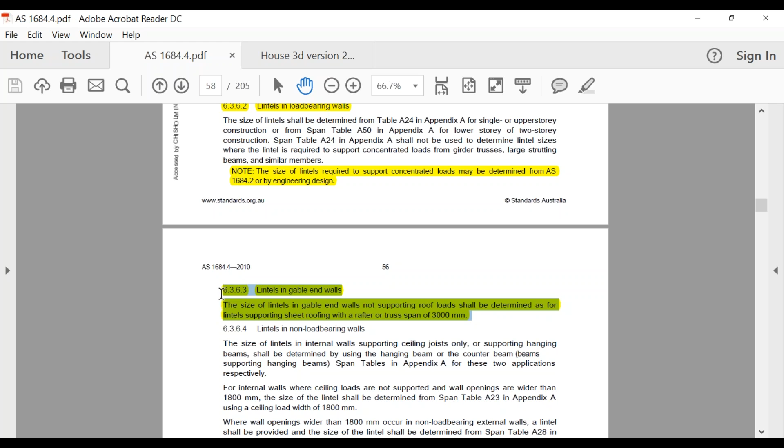Alright, cool, that's one there. This is some stuff you guys would find out on your own. It says the size of lintels in gable end walls not supporting roof loads shall be determined as for lintels supporting sheet roofing with a rafter or truss span of 3 metres. I haven't heard of anyone actually being asked that, and normally in my face-to-face classes I haven't had to go over it, but since it's highlighted, I thought I'd explain it to you.

This is another thing too—keep note of this, highlight this one, sorry I should have told you. On page 55, note the size of lintels required to support concentrated loads may be determined from Australian Standard 1684.2 or by engineering design. Definitely highlight that, and we're going to cover in fair depth once I get through this standard what concentrated loads are.

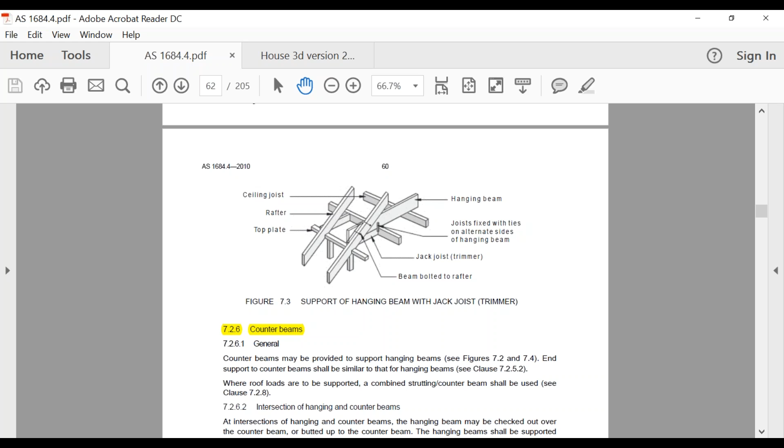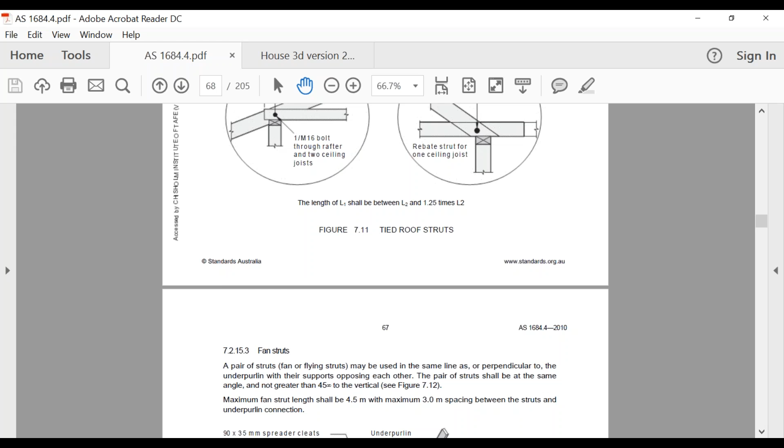Another one that comes up in your multiple choice is some stuff occasionally about your pitch roof or conventional roof, whatever you like to call it. This is about your collar ties—it talks about how long they need to be, how they need to be fixed, and how they need to go into every second rafter. So there's a bit of stuff there on collar ties if you wanted to highlight and mark it, because pitch roof probably isn't one of our strong points, I suppose.

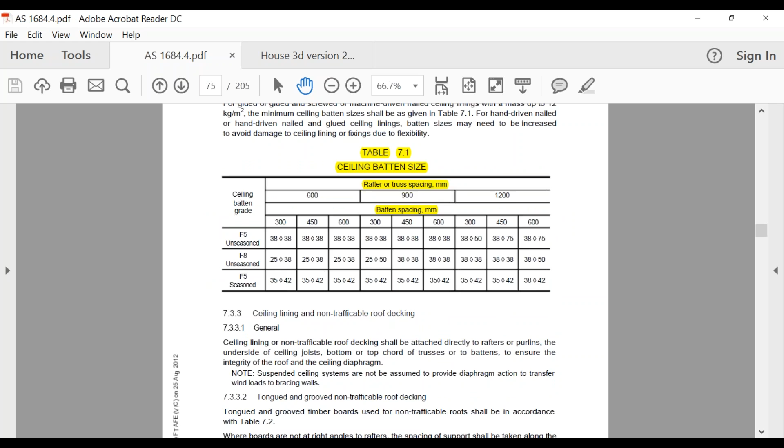This is one I'd flag, probably more so for tonight. I haven't heard of a lot of people having to do this when they've gone into the VBA, but when we're doing our span tables later on, just about every member size we're trying to find is at the back in our span table index. But for some reason our ceiling battens are here. From experience, every time someone's done this unit for the first time, they've said, Adam, I can't find the ceiling batten sizes—because they're not in the span tables, they're on page 73. So if I were you guys, I'd basically just highlight that and chuck a tab on it, because otherwise, guaranteed, if not tonight when we do the exercise, later on you'll be going, where are those bloody ceiling batten sizes?

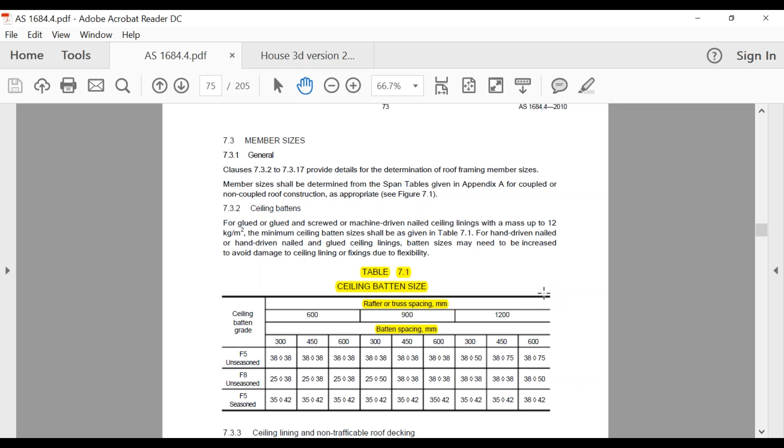All right, so this I'm just going to flick over. This is what we did tonight with all our bracing. So if you're wondering why I'm flicking over it, we would have all basically highlighted this earlier in tonight's session. So I might do it this way to make it a little bit quicker.

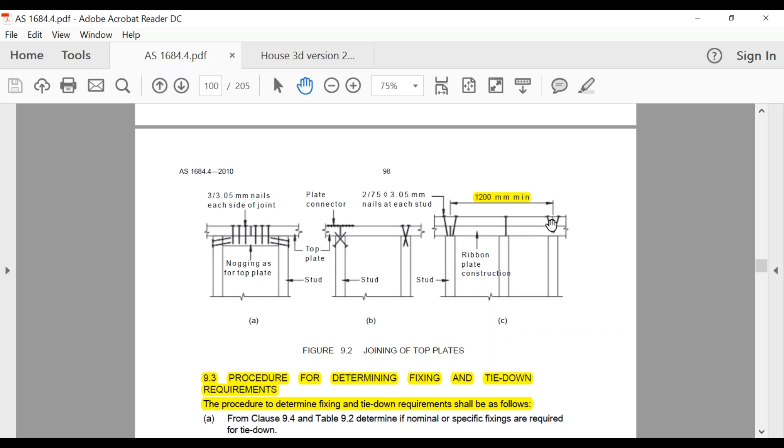Alright, so this is the last little bit I think we need to do, and then we can get on to the exercise. So this here talks about, guys, when we've got a ribbon plate, like your double top plate, and it shows us, if you can make sense of the drawing, I'll make it a little bit bigger, that on the bottom one the join's on that stud, and on this one here the join's on the top over this stud, and the distance between those joins has to be 1200 millimeters. And then it obviously shows that we need to put nails on either side of the joint.

And then on here, so this is nominal fixings. Definitely highlight this, and this is then talking - this is stuff in multiple choice you'll get - basically just the different size nails or fixings we need to use for our different timbers and so on. So here's for our plates to our studs, our bottom plates to a concrete slab.

This will make you chuckle. 75 millimeter masonry nail that's hand driven at the slab edge, or we can screw or bolt at not more than 1200 millimeter centers. So yeah, I don't know anyone who's still actually hand nails. I know I did as an apprentice, but since I was an apprentice, I haven't. So that's your nominal fixings. Talks about how all that's got to be done.

And then on this one here, same thing again, this is fixings again, but this is specific fixing requirements for wind classifications if it's in an N1 basically wind rating with a sheet roof, and that talks about it in there.

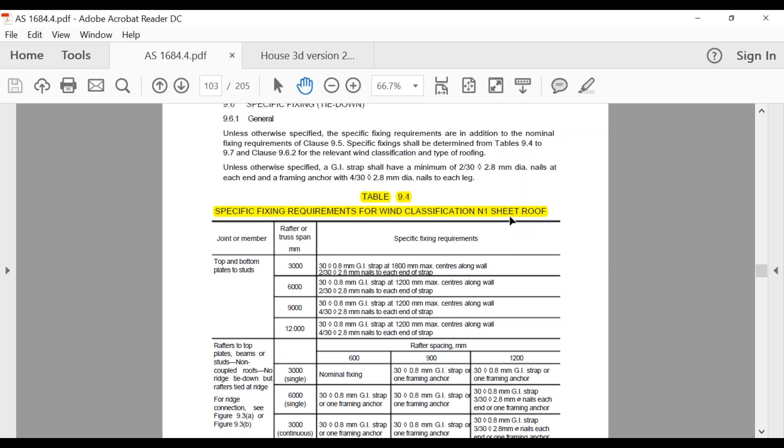And that really just flows on to the next table, and the next one as well talks then about same thing, specific fixing requirements for then our tile roof. So you maybe highlight those ones. So if I'm going too quick, definitely let me know as well. I just realised I've scanned over those last 4 pages pretty quickly.

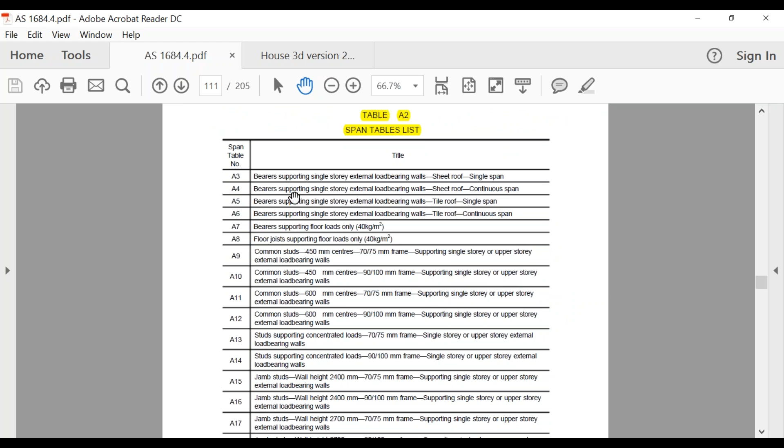And then from there, the last tab that I have in my book is this part here, which is our span table list. So I've got a tab there. So whenever we're doing our member sizes, our bearers, our floor joists, our common studs and so on, this is basically where we come through in these tables here.

And so that's basically, I said, what I've got in my Australian Standard, and sort of the feedback from the students who have gone through basically the VBA as well, what they've been asked. And so what I'll do now, I'll bring up this exercise that I think we should do, or we will do tonight, is just a few things that I want to explain to you.

So before we were talking about a concentrated load. So just before you go and tackle this, and this is when you basically go in and do your plans, it's very easy, I suppose, to rush because you're looking at the clock going, geez, I've only got 2 hours to get this done. So try not to rush into it and just have a good look at it first before you start tackling it. So what I want to talk about is a concentrated load.

As I got you guys to highlight before, we actually can't design using this standard concentrated loads. It's got to be done out of 1684.2 or by engineer design. And so that happens then with our jamb studs on it as well, because they're supporting a concentrated load, we actually can't design those jamb studs either. So that's one thing I wanted to cover about that.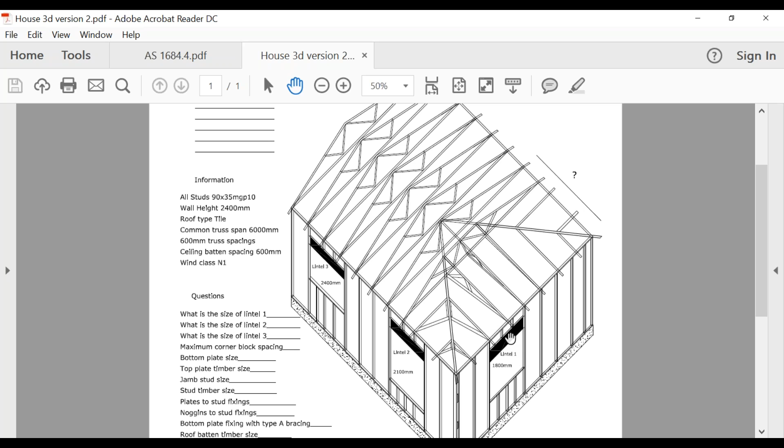So the reason why I'm telling you this is because when we're actually looking at lintel 2, it talks about the span of the load above lintel 2. And you can see that span doesn't actually go all the way to that last truss. So we wouldn't go on there and say lintel 1 is supporting a load that's got a span of 6 meters, because the 6 meters is actually across. So obviously lintel 3 would be supporting a truss.

I might make that a little bit bigger. Lintel 3 would be supporting a truss that's got a span of 6 meters. So in order to work out how far this is spanning, we know that the length of this wall here is 6 meters. So in order to achieve 45 degrees, half of 6 is 3. So we come back 3 meters, and that's where that last common rafter sits.

And it tells us here that our truss spacing is 600 millimeters. So this truss here, the girder that's got all these other little creepers going into it, if we come back 600 millimeters, 3 meters minus 600 gives us 2.4. So that girder that's basically taking all that weight is 2.4 meters back from the end of the wall. So that little truss sitting above lintel 1 is actually only spanning 2.4 meters.

So when we go in to design the lintels, I forget how it's worded, but I think it might say truss span. That truss span is only going to be 2.4 meters. So that's what that's about. So just a heads up for you guys, when we come to do this, you'll be able to design lintel 1, lintel 3, but you won't be able to design lintel 2 because it's got the concentrated load on it. So just be mindful of working out these spans.

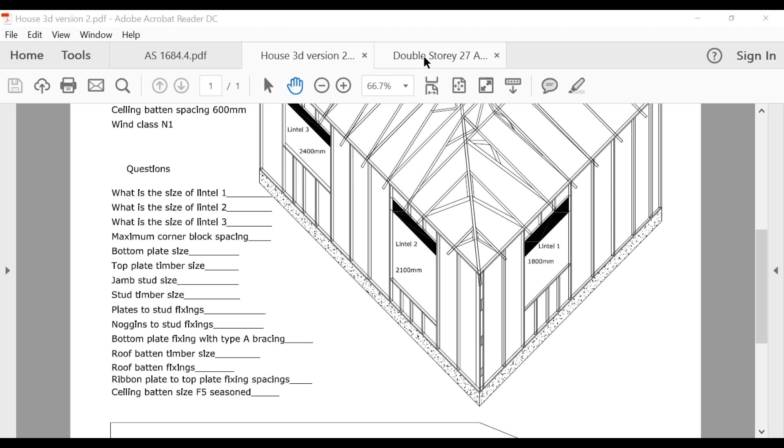Since you've finished, Tom, had you seen this one here that I emailed through before? Because you're from Sale, is that right? Have I got that right? Yep, cool. And so you'd seen that? Did Steve show that one when he was down in Sale? Cool, thanks Michael, yeah cool, no worries at all. Cool, thanks Jeff.

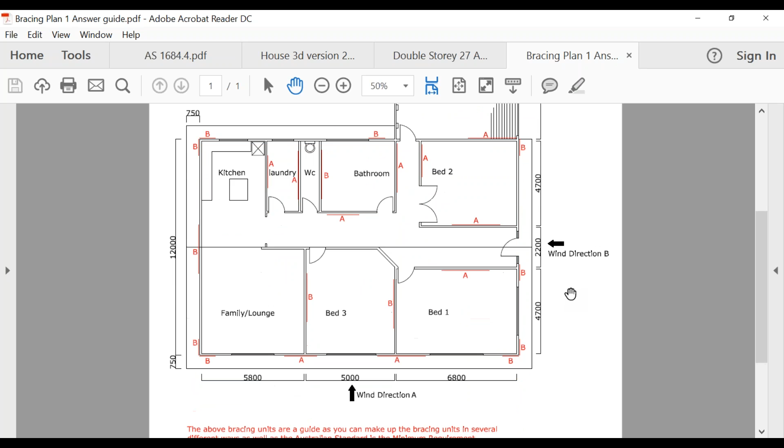And if you look at the one, it says the direction A, and we need 22 bracing. Yep, 22 type A. How do you mark it? If you count them... sorry, did you say something? Yeah, no, not at all, no you're right. So it says 22 type A.

Yep, and I just counted, and looks like it has only 11 or 14 of them. Okay, did you count the Bs as being 2 though? Because remember the Bs are twice as strong. I did, yes. Yeah, okay.

Yeah, I don't know, so let me count them up. I said because I didn't actually... This is Steve's answering guide, so let me have a look at it and I'll count them up. Sorry, I made a mistake, I need to count it the other way. Sorry, yeah. Okay, oh, so you've gone the wrong direction. Okay, no worries, yeah have a look. If it doesn't make sense, definitely let me know. Sure, yeah, thanks, sorry. You're all right, mate.

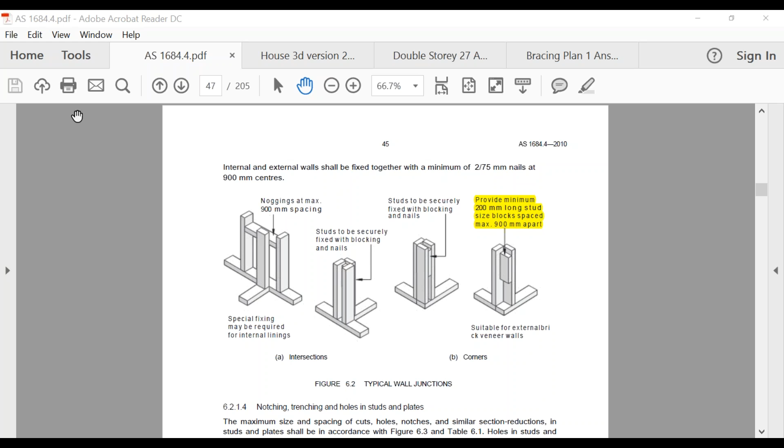The lintel size and lintel one, I'm not sure how did you work out the size? Okay, I lost it, yeah, okay, it's cool. No, so I'll go over that. With the lintels, we need to go to that table at the back.

I'll just go 1 second, mate. All right, so we go to our span tables list, and what we're looking for down here, we'll see somewhere where it talks about lintels - lintels supporting single story or upper story load bearing walls. It's on table A24, so I'm going to go to table A24. All right, so this is our lintels supporting single story or upper story load bearing walls.

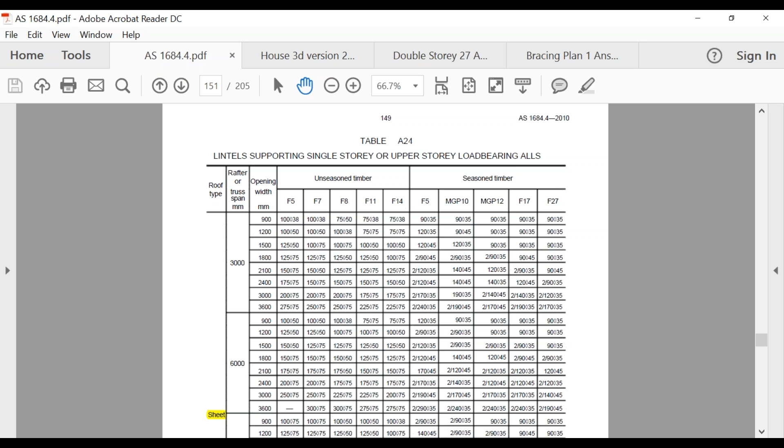So when we go to this, we need to put our scenario in. This whole table is actually on a sheet roof - I'll make that small for a second - so we need to go to something that's going to be a tiled roof. When we turn the page, this page here is all for lintels on a single story or upper story load bearing wall for tiled roofs.

So the next thing we need to work out is our rafter or truss span. Looking back at our drawing here for lintel number 3, it tells us our truss span is going to be 6 metres.

So I come back to the standards: tile roof, truss span of 6 metres. What's the size of the opening? It's 2.4 metres. So I line these up: tile, 6 metres at 2.4, bring that across. We said we're using MGP 10, so line that up, and that gives us 2 170s by 45.

Does that make sense? Now for lintel number 1, remember I said when I look back at this picture, that span is 3 metres, so we minus 600 millimetres, making the truss span only 2.4. Same scenario: tile roof, 2.4 metre span, less than 3 metres, so we use this one. Then we find our opening width was 1800 millimetres, bring that over, and it gives us 2 120 by 35.

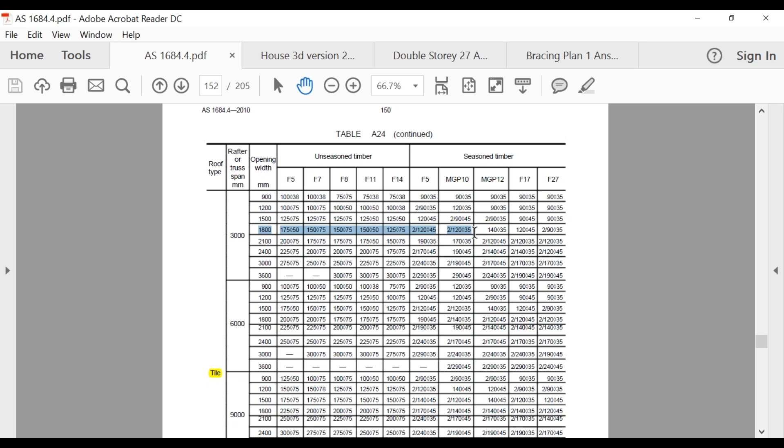If you like, mate, since you know you got those wrong, let me know and I can send you something else, some practice ones on that. Just remind me at the end of the session. Sure, that would be good. Thank you. Cool, all right.

So back to our other questions. Oh, I've lost it. So we've got our nail sizes. Our noggins to studs were 2/75 by 3.05 skewed. Our roof batten timber size is, where are we, 35 by 42.

Oh sorry, I missed one there. The bottom plate fixing with a Type A bracing is a 75mm hand-driven screw or bolt every 1200 millimetres, and then the roof batten timber size is 35 by 42.

Now this is one that most guys actually get wrong, so don't stress, it's only a nail size, you're not going to lose your license over it. As far as the roof batten fixings, the actual size is 75 millimetres by 3.05. Did anybody not get that? I suppose most of you probably got the next size down, which I think is a 50 millimetre from memory. Let me know if anyone didn't get 75 and I'll explain why. I find most guys don't actually get 75.

Awesome, we all got 75. Geez, you guys are going awesome. So then, no you didn't, cool, so let's go back to it. I thought a couple wouldn't.

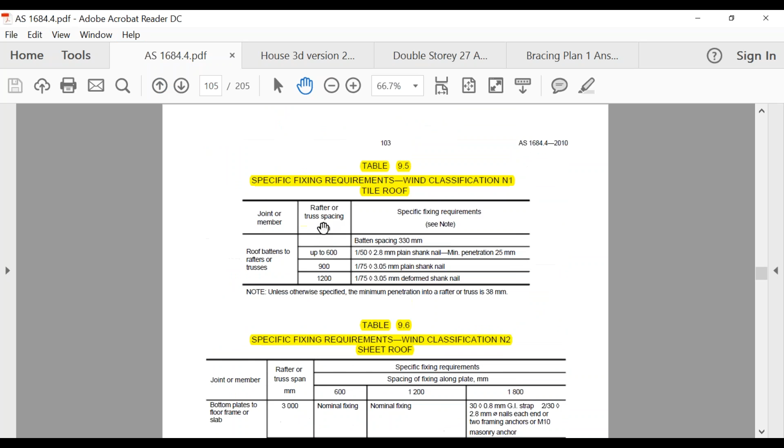So basically, guys, if I come back to page 103, it's just got to do with the minimum penetration you've got to put into the truss or rafter. One second, I'll grab my book because I've highlighted it, and then I'll show you. So it's on page 103, this is where you guys would have been looking. We'd have probably found stuff here, but then further it says fixing requirements for tiled roofs, and tells us we need a minimum penetration of 25 millimetres, depending on the wind rating, because our tile batten itself is 42 millimetres.

I'm trying to think which way to go. It's 35 millimetres deep and 42 millimetres wide. So with the 35 millimetres deep, if we're using a 50 mil nail, which is probably what you would have written, did you write 50 mil? Is that what the answer was for the guys who didn't get 75 mil? Yeah, you probably put this one here. It tells us that if we're using a 50 mil nail, we need a minimum penetration of 25 millimetres.

So when you do the sums, if you've got a 35 millimeter batten and it's a 50 mil nail, then it's only actually penetrating 15 mil. So that's why you need to step up to the next one. So don't stress if you got it wrong, guys. It's only a nail on your roof batten, and realistically you're probably going to use your 75 mil anyway because you're going along with your framing gun. So that's why we basically got that answer.

And then the ribbon plate to top plate fixings, I've got here 2/75 by 3.05 nails, but I'm thinking if we went a larger top plate at 45 mil, it probably then goes up to the next nail, does it? That's one there too where I've got two answers, from the different scenarios I've been running. So why don't we just have a look at those nominal fixings. Or can anyone clarify that for me while I'm trying to find it? No doubt you guys have found it.

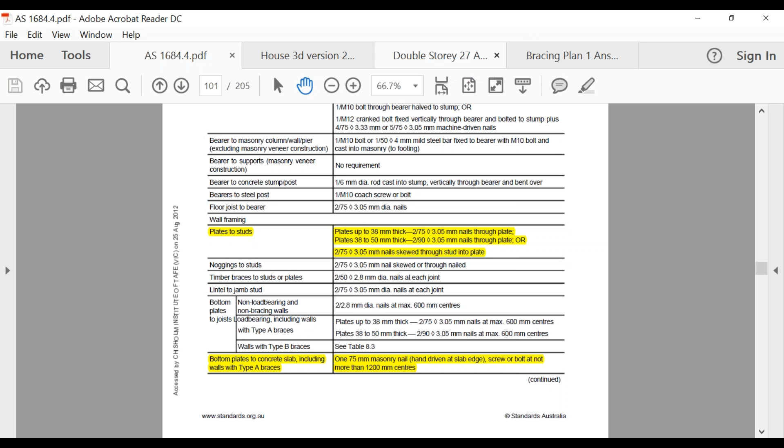And then the ceiling batten size was 35 by 42. So hopefully that all made sense, guys. If I did get anything wrong, definitely let me know, because as I said, I do this exercise and change the scenario, and when you see my answer sheet, it's got stuff written all over it, so I sometimes do get them a little bit wrong.

Yeah, cool. I can do that for you, Valavan.

No worries at all. So what I thought I'd do, guys, that's sort of all I wanted to show you tonight. And by all means, if you're going to come in next week, welcome aboard, we're doing the masonry. I just thought I'd show the guys who haven't seen this plan before. There was a couple - sorry, not that one, this one here. I thought I'd just run through it because you guys can have a crack at that in your own time, or stay on tonight after I log off and see if you want to do it then.

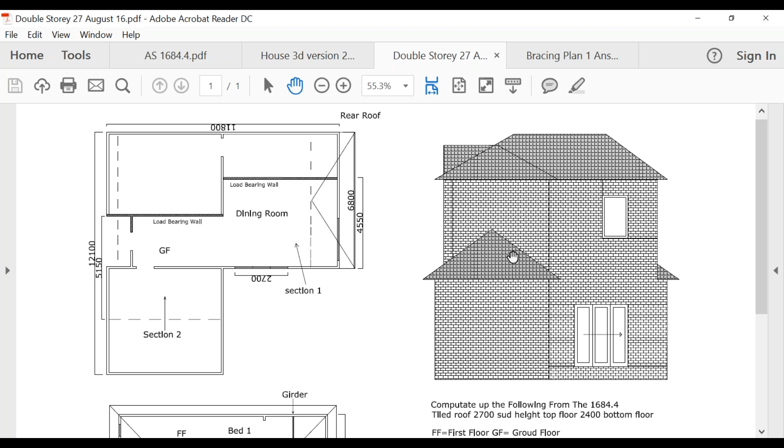This is something that the VBA were getting guys to do, and down here is basically the scenario, and it says they want you to do the computations for the following. Some guys get a little bit confused when they look at the picture, because this is your GF, your ground floor, and this is the FF, your first floor, the upper story. So on the ground floor, they see this dashed line across, and that's actually the outline of the top story. When you look at the elevation, you can see it's set back a little bit.

So therefore, when we're working out our floor joists, because that's where your external wall is going to be, it's going to sit there for your floor joist. It tells us that it's basically 5,150 millimeters - that's how long it is from there to a load-bearing wall. So when they ask you to do the computations on that floor joist, it's actually a bit of a trick question, because when you look at your standards, the longest span you can get out of this Australian standard we're using is 4.8 meters.

Your top plates, they want you to work out your studs, and then I'll get to that in one second, Jeff.

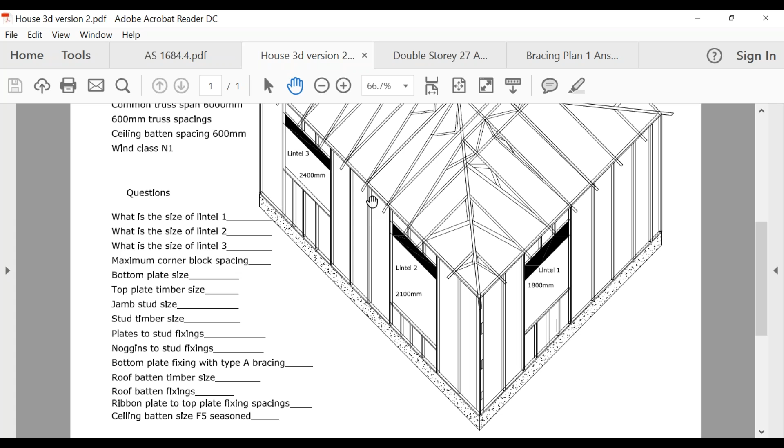Yep, cool mate, one second. So Jeff just asked me a question - he's saying we said that we got 290 by 45, but he got 290 by 35 for his top plate. So bear with me one second, mate, I'll bring up the standard and we'll have a look.

Oh, Ben got it as well. I said, and that could have been something on my end from the two exercises I've done. So let's have a look.

So let's just go through it. What are we doing - top plates is on here. So top plates, and we're using 90 mil because obviously we're using a 90 mil frame. So top plates not trenched, single story or upper story external load bearing walls.

Yeah, that's it, because it doesn't actually say on there whether we've got our studs at 600 spacing or 450 spacing. And that's one thing - I've got it handwritten here on my notes to actually put them at 600 millimeter spacings just to try and get guys to do something a bit different. But if you would have done 450 spacing, which we normally do, then you would have got a smaller size top plate.

And then obviously with the smaller size top plate, you would have had smaller size fixings because you would have only had to go through a 35mm top plate into your stud. So yeah, sorry, that was probably my bad, because on this drawing here it doesn't actually state what our stud spacing is. So normally I say okay, let's use 600, but I forgot to actually mention that.